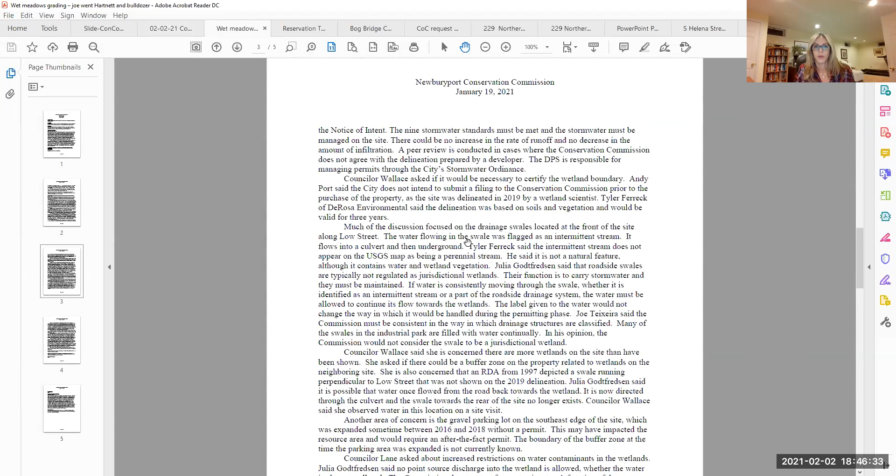Gretchen, the very last section on Plum Island updates, about halfway through that paragraph, it says the concrete block wall has been destroyed and could not be reinstalled, and there is now no remaining beach. It should say there's now no remaining dune. And then the next sentence, DEP would likely not permit some possible solutions such as a stone revetment or sheet piles, which could worsen the problem by creating end scour. That should just be scour. And then the next sentence, DCR has released the Upper North Shore Regional, it should say sediment management study. And that's it.

Good. Motion to approve as amended? Second. All right, Paul Healy, yes. Steve Moore, yes. Dan Warshaw, yes. David Vine, yes. Ron DeCola, yes. And I vote yes.

All right, the next item is Plum Island updates. Okay, while I bring up those photos that I sent you, maybe Joe or David, do you want to give an update on the other stuff that was discussed at the MRBA meeting last week? David, why don't you? Yeah, there was a meeting this past Friday, and quite a number of people attended. It was like 55, 56 or so.

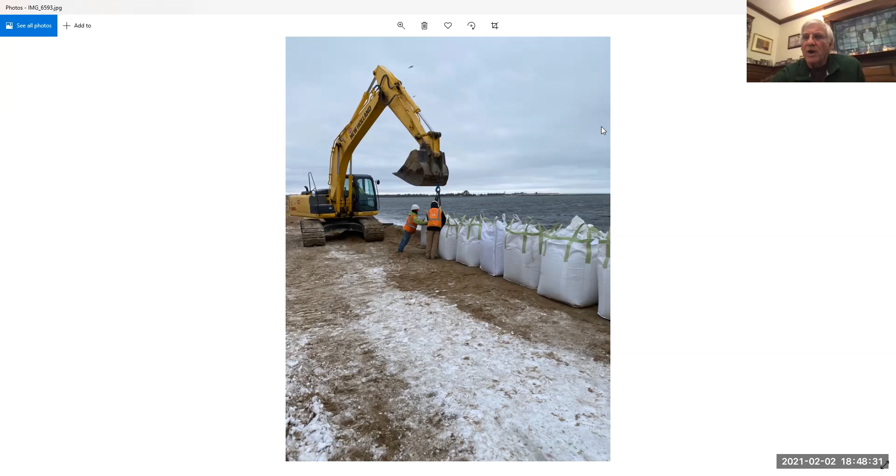The majority of it was about the dredging project. I would say the two dredging projects, the one from Portsmouth and the one in Newburyport. And I was a little late. Were they saying that the actual dredging was gonna start this fall? Or was it next fall?

I think they meant that they're going to try to start late fall, early winter of 2022. I mean, 2021, that makes a lot more sense. 2021. Oh, so that is this fall. Yeah, that is this, yeah.

And one of the things they talked about was the Corps is actually putting in for 60,000 yards within the Reservation Terrace area that would be included with the project. And they mentioned that if a larger amount, I think there was something like 225,000 yards they were kicking around, it's possible to get more of that. I guess it's important that the state DCR get involved in this because they'd be the sponsor. And it sounds like there's a lot of paperwork to get in place here. They have to all be permitted and so forth.

So it was very encouraging to hear that, as well as the Portsmouth project, which I believe the last meeting they weren't so certain was going to happen. And I guess now it's on its way to being implemented. Yeah, weren't these two projects two of the only ones that got approved? Yeah, they mentioned that it was very impressive that these two were. I guess there was a lot of competition from other projects throughout the country.

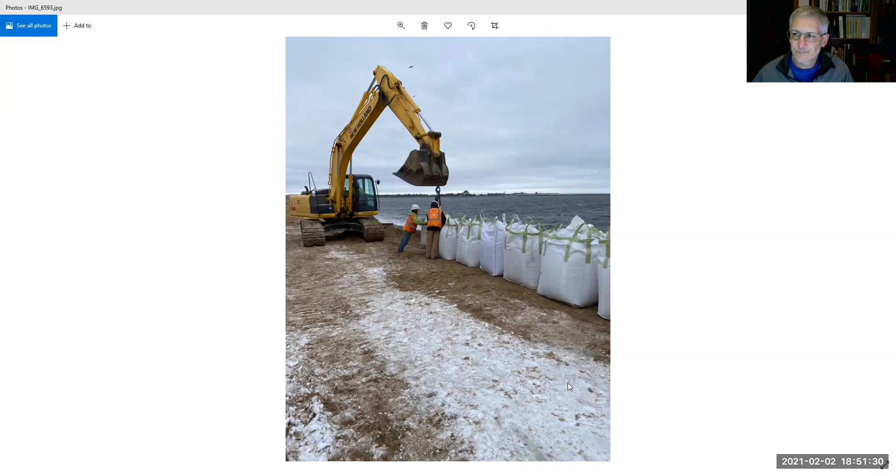So they had the call, and at first they were talking about stones and revetments and sheet piling and hard structures. DEP said no. CZM said no, they're not going to allow any hard structures out there. What they did do was commit to assisting with sand and more sandbags and maintaining it until the river gets dredged. So they committed DCR and the state to trying to manage this problem area until such time as we can put that dredged sand on the dune. And this was the first step in front of the storm, to put out these sandbags.

And they needed an emergency certification from the Conservation Commission to do that. So yesterday morning, I got a call from the mayor. I issued an emergency certification that I signed as the administrator. They started immediately. And the hope is that you all will ratify that emergency certification tonight. And I can show you now the next photo, so you can see how it went.

So this was this morning. That previous picture was yesterday morning when they were putting the sandbags out. And you can see what happened to most of them. There's still some remaining in the southern part of the stretch, but most of the rest kind of succumbed to the storm. The road, as you can see, was heavily damaged and broken up even further than it was before. And all that sand is just in Reservation Terrace. So it did help. It's hard to imagine what would have happened if those bags hadn't been placed there.

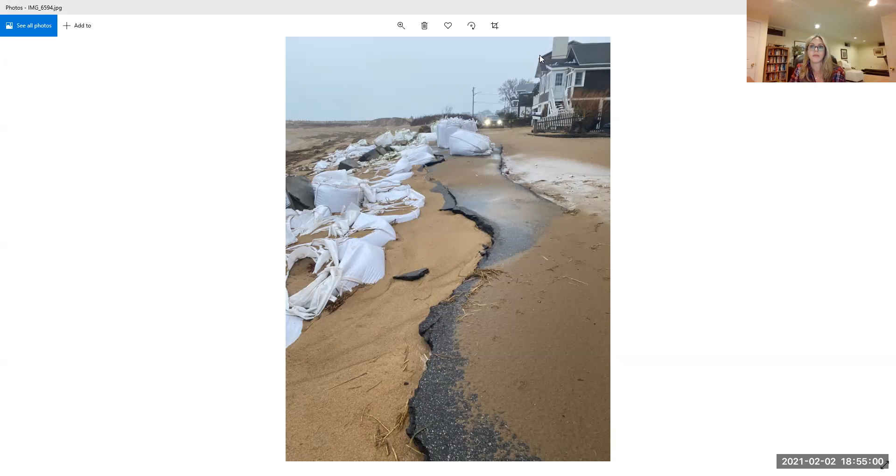Yeah, so far they've stayed intact. They've just sort of been emptied and pushed around and sort of covered, buried a little bit, as you can see in the pictures, but they have not shredded that I've noticed or that I've heard of, which is good. And on the comment about the no stone, was that as a temporary solution, or was that a no stone ever kind of position? That was a no stone ever kind of position, because I think the only way they might have ever even considered allowing it would have been for an emergency such as this, or a temporary situation, and they wouldn't allow it even for that. So they certainly won't allow it as a permanent solution.

As a new member to the committee, is there a reason for that? Yeah, it has a lot to do with coastal geology and coastal dynamics. When you put a wall or a hard structure on a dune that's getting any kind of wave activity, you actually end up undermining the beach and dune worse than where you started. It creates a different sort of physical dynamic. It ends up pulling sand out from underneath and around the sides of whatever that hard structure is.

They've been used over time, and you'll see seawalls and revetments all over the place in coastal areas, but they typically don't allow new ones unless absolutely necessary, especially on a dune. Because it's like saying goodbye to your dune and your beach. Yeah, the beach out in front of the stone on Newbury is essentially non-existent. It's always gone at high tide, and the rock piles just collapse too, and they've got to keep repositioning them. Right. So it really makes a mess, and it works just like the concrete blocks you can see there. Stuff just gets undermined and makes matters worse.

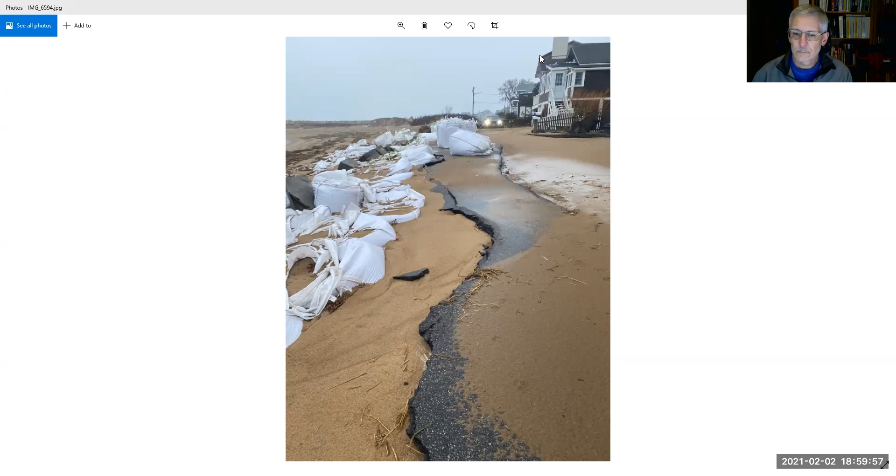Okay, I'm going to resume the share. So can you all see this emergency certification form now? Yes. Okay, so this is what was issued yesterday with my signature on an electronic signature form, but I would just reissue this same; they've done the work, it's all done. But technically speaking, it should be ratified by the commission at the next commission meeting, which is tonight. So if you all could take a vote to ratify this emergency cert, then we'll just sort of cross the Ts and dot the Is.

Just one quick question, I see the end date is March 1st. So does that mean if they go out there again, let's say this week or next week to put more sandbags out, we don't need to do this again? They're covered? Exactly. Yep, and I was very specific. I said placement of super sack sand filled bags and additional sand nourishment as necessary. So they can continue to go out there and add more sand until March 1st.

David, you have a question? It was the same question about whether we were going to be... Uh-oh. David froze. Oh, there you go. You're back. He's back. Okay.

So it's just through March 1st. If it goes beyond that? Goes beyond that, I think you can do an extension of an emergency certification. We've done that in the past, but either that or just issue a new one. Okay.

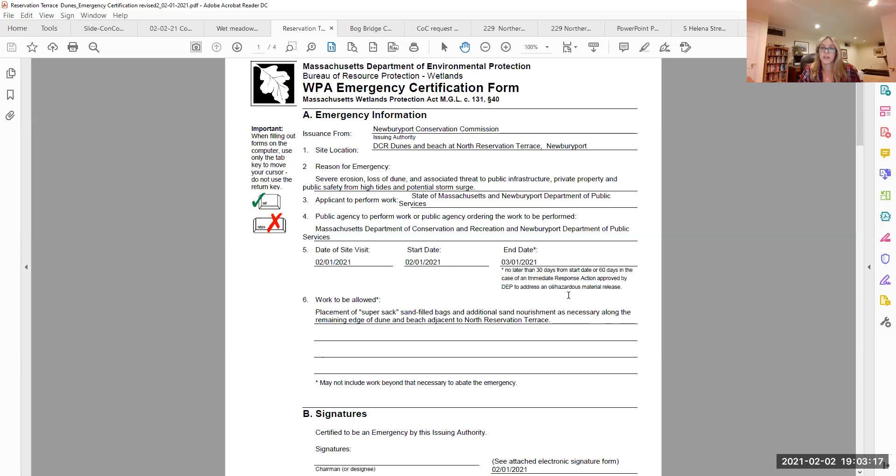I believe the case is because it's Army Corps of Engineers, they're exempt from local permitting. I don't think they need an order of conditions to do the actual dredging itself and to take the sand and place it out in their near shore disposal areas that they have already established. But to put it on the beach, which is the proposal they were trying to get approval for, and hopefully will happen, that will require local permitting through Concom and all the other associated parts. And DCR would be the applicant. Yeah, we'll have that probably, hopefully this summer. Good.

All right. You all set with Plum Island updates and such? All right, next item is the Marlene Schrader Nature Trail proposed bog bridge. Jerry Mullins. Okay, let's see if Jerry's here. Yes. Promoting you to a panelist, Jerry. Give yourself a second and then you'll be able to unmute yourself. Okay, I'm all set. Okay, great.

So at the last meeting, we talked about the bridge that was created across the small depression at the end of Colby Farm Lane. And let me just see if I can find the photos of that. Well, in any case, hold on. All right, can you see this? Yep, we can see it.

So it was determined that the bridge that was created was not safe and was actually also impacting the stream bed. And so it needed to be rebuilt. And so you suggested a bog bridge. Can you all see this? Yeah. But this isn't what you wanted, right? No, I thought you were gonna pull up the picture you took of that area, but I know, I can't find it right now. Okay.

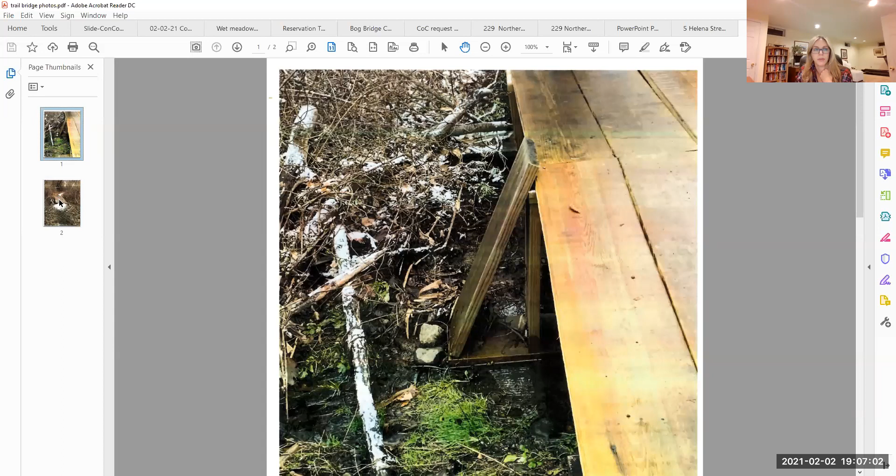Okay. So Julia, if we could go back to that initial drawing you had up there that showed a bog bridge, and maybe that was Jerry's screen, I don't know. Yep, I got it. Hold on a sec. This one. Yeah. So I'm not opposed to what we just talked about, but this is what I think of as a typical bog bridge. It's actually logs cut in half, attached to those sleepers, but lower down, it also says that we can have full logs.

And I had a question. Joe had submitted a drawing with the boards across with that extra support underneath, and I don't know if you have that drawing at all. Let me see if I can bring that one up. That was really excellent. You know what? I tried to get that to load into Zoom earlier, and I couldn't copy it from Joe's email. So I apologize, I don't have that to bring up. But Jerry, do you have that? Maybe you and Joe can explain to the rest of the commissioners what that looked like.

Well, basically I have 2 full logs on either end. And then in the middle, we'll have those long 12-foot lengths butted up against, and then underneath will be an extra board that'll help brace it. Plus there's 2 smaller boards that could be put right about where the logs are to keep it firm. So the whole purpose is to stop the bounciness. And I had a question about that, Joe.

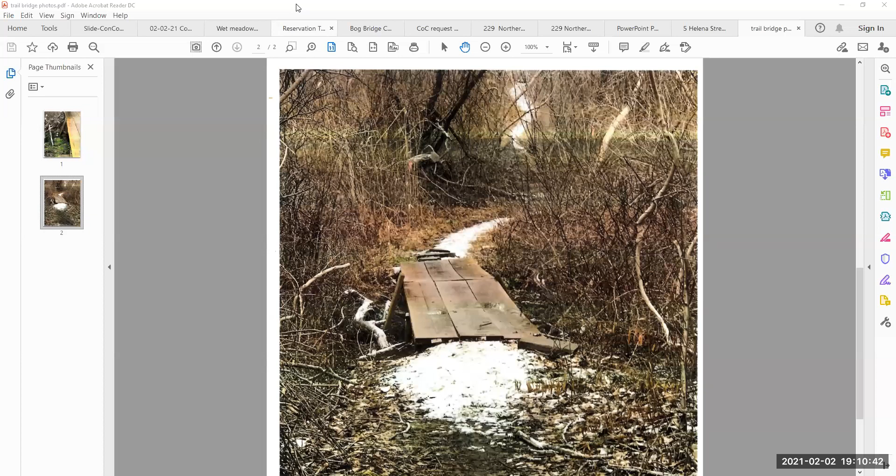But I don't know what size logs you have, Jerry. I sent a picture of some of the leftover logs, I don't know if you have that, Julia, that were left over from the Boy Scouts project, and they're massive. So I'm going to be hauling them over the hill and back down to here so we can use them. So Jerry, the picture that's up here, those are the boards you're planning on reusing, correct? That's correct. So the bridge that's there is actually 24 feet then, right? Right. So it's going to be half that length and hopefully less bouncy.

No, it'll be the full length, but those two right ones will be put underneath to make it firm so it won't bounce. Or bounce less. Yeah, or bounce less. Okay, so it's still going to be 24 feet long. Right. So what's going to be in the middle that's not in the stream, tying those together? Those two extra boards to make it firm.

Yeah, the two lengthwise boards there on the right will just get screwed to the bottom of the pair of other ones as extra. So there's not going to be any support to the ground in the middle. Right. It'll be open for the stream. That's the idea. Yeah, I guess we'll see. I would see that still being pretty bouncy.

Yeah, and you definitely would need pretty strong screws rather than nails for that to hold. Definitely. It's worth a try. Otherwise you'll need longer boards. I'm thinking, well, would a 12-foot bog bridge accomplish what we need? I mean, I just think a 24-foot span, even though you've got something underneath, is still going to be pretty bouncy.

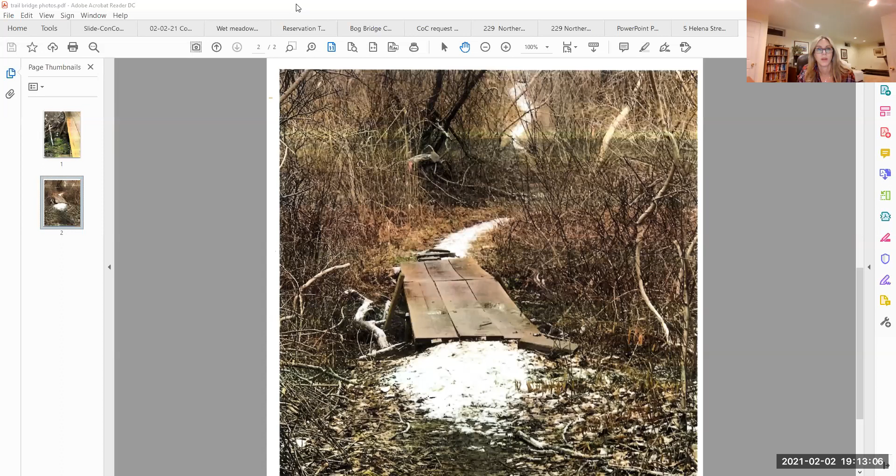You may be right, Steve. And that was my original drawing I submitted. That would be a shorter length. I can go back to that. Yeah, let's see that. That was here. Yeah, I wasn't seeing it as 24 feet. Thought it was shorter than that. Yeah, this one, 12 feet.

Yes, but what worried me was that you've got these supports down at the bottom at the base of the stream. So if there's more flow down there, that's really the topography, then they're going to be in the stream bed. Well, I can make sure they're up on the bank. It's a pretty steep depression there, so.

I can safely say from experience, if it's really flowing there, it doesn't matter what kind of bog bridge is there. It's probably gonna take it out. If we get another Mother's Day storm sort of thing, that's definitely not gonna stay. But that's kind of a flow by; the main culvert and everything is further to the left on that path.

Or right, I don't know which way we're looking here, but there is actually a culvert that the stream normally goes through. And when there's really heavy flow, it goes over the path there, and it also goes over the path here pretty strongly, shall we say. So I think we need to go out there with a measuring tape. We can sit here and try and engineer it, but maybe Joe and Steve, you want to meet Jerry out there and work through these details? Yeah, sure.

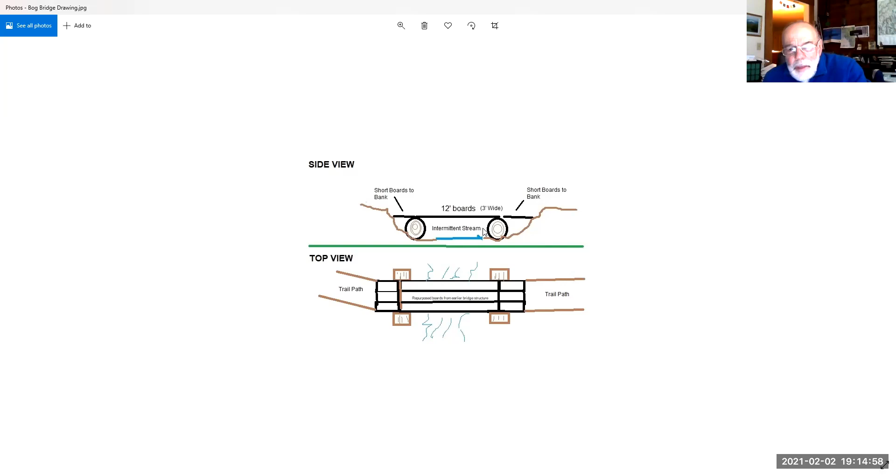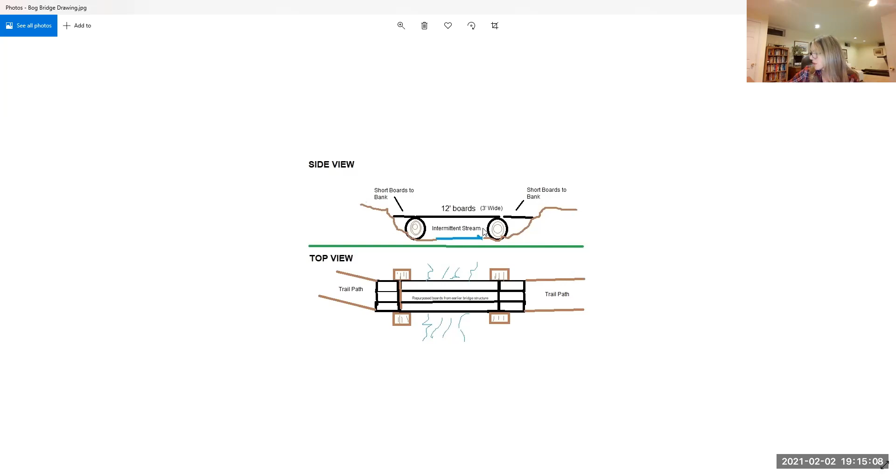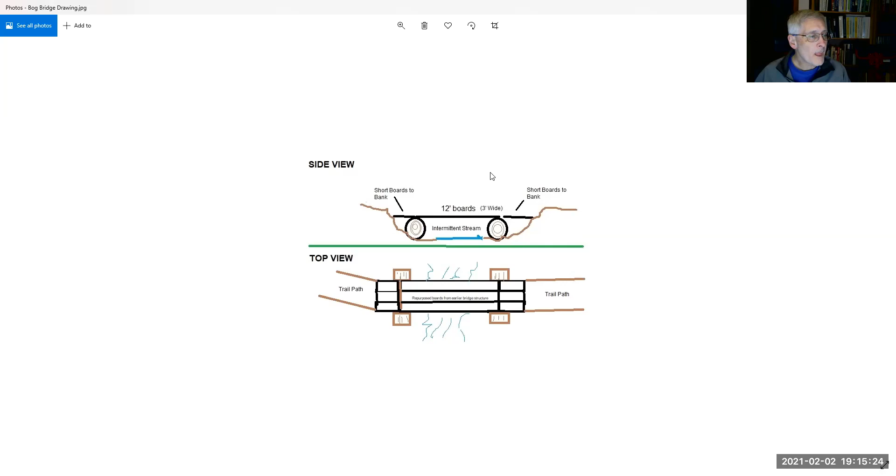I think even with the snow, we could probably take a look at it and come up with something. Oh, yeah. Okay. That sounds great. All right, well, the three of us will organize that. Great. I'm available the rest of the week. Okay. I'm sure I can find time. All right, we'll contact each other. All right, thank you.

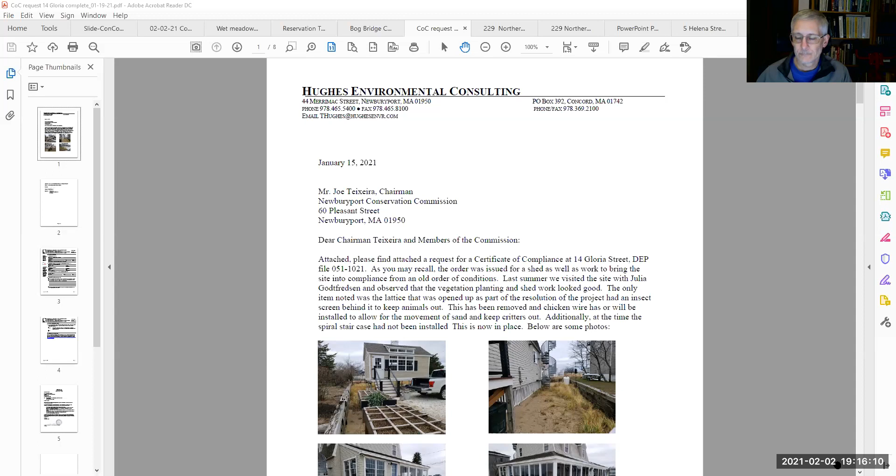Let's move on to Kevin J. Legacy, trustee, Basin Realty Trust, 14 Gloria Street. Request for certificate of compliance. All right, I'm going to promote Tom Hughes, if he's here, to a panelist so he can present this request for certificate of compliance. All right. You guys can hear me? Yep. When you promote me to a panelist, it logs me out for a second, so sorry for the pause.

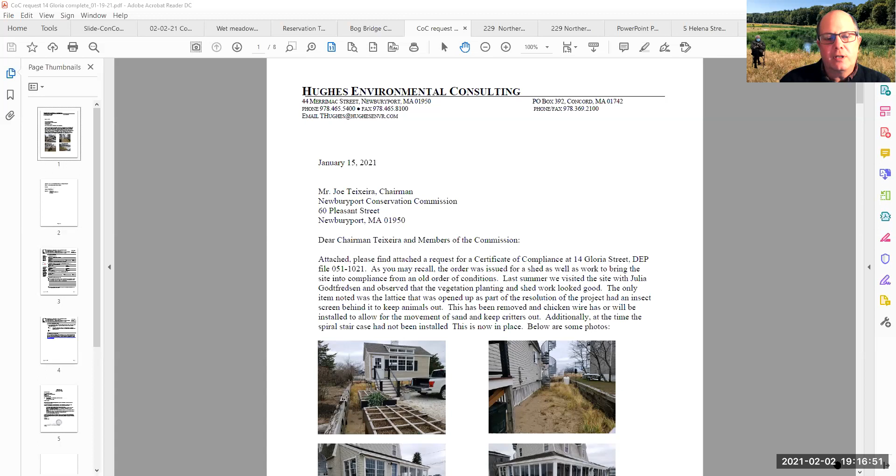All right, you may remember 14 Gloria. We came in, there was an old open filing for the building of the house, and you guys did a site visit, and we basically closed out the old permit, permitted some remedies for some issues, and also a new shed. And so all that work has been done. You can see the shed in that photo. I can either share it, or Julia, if you can just scroll on those photos a little bit.

Yep. Now these photos, the vegetation looks a little less impressive because of the time of year these were taken, but we visited the site with Julia over the summer, and the vegetation really looks great. So on the shed, among the minor deviations that Everett called out in his letter, the stairs are a little bit longer, but that's because the shed's a little bit higher up in the air.

So I think it's a little bit of a win-win for that. You can see we certainly have our 2 feet of clearance under that shed. You can see the vegetation is growing in and around that shed really nicely. And then you can see the spiral staircase is in. The area where the footpath was shown going to the spiral stairs has vegetation coming into it, so there's more vegetation than we actually said we would be planting.

Everett did note that there's a small platform under the grill down there on the bottom, but it's just to keep the grill from sinking into the sand. It's nothing like the network of on-ground platforms that were there when we first visited the site. And you can see the vegetation is growing beautifully all around there and right up to the street. So the site looks great.

When we did do the site visit, the applicant had put some insect screen behind that lattice because critters were getting in underneath. That's been removed, and we talked to Julia about putting something that's sort of 99% open, like some chicken wire in there that would still keep the critters out, but not be as much of a block as the insect screen. Now he hasn't put that in yet, but if the commission's okay with that, he will be putting just normal hexagonal chicken wire.

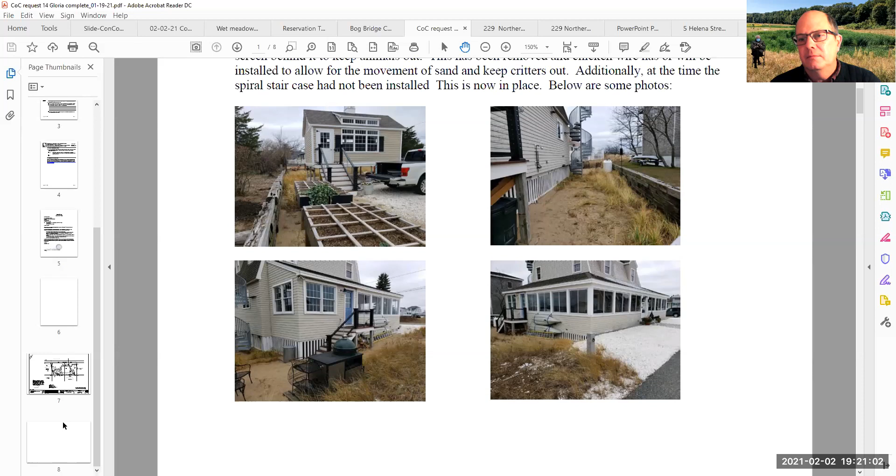Okay, do we have any questions? Does Senator Sanders have any comments? Oh, he's too busy sitting out at the Evergreen Field.

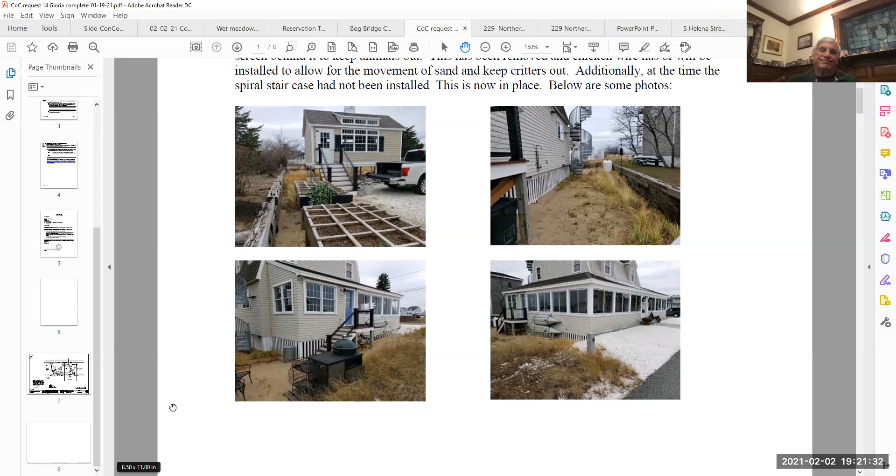Is there a motion to issue the certificate of compliance? Second. Paul Healy, yes. Steve Moore, yes. Ken Warshaw, yes. David Vine, yes. Ron DeCola, yes. And I vote yes. All right, thank you. Thank you very much. Take care. Thanks, you too.

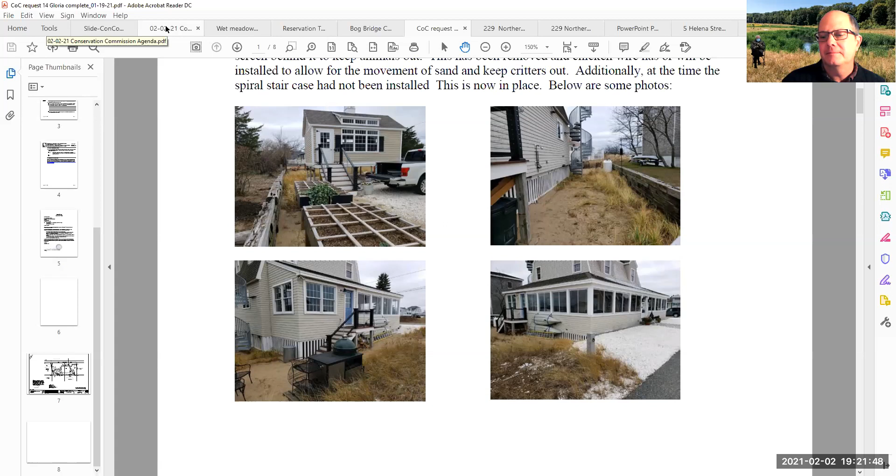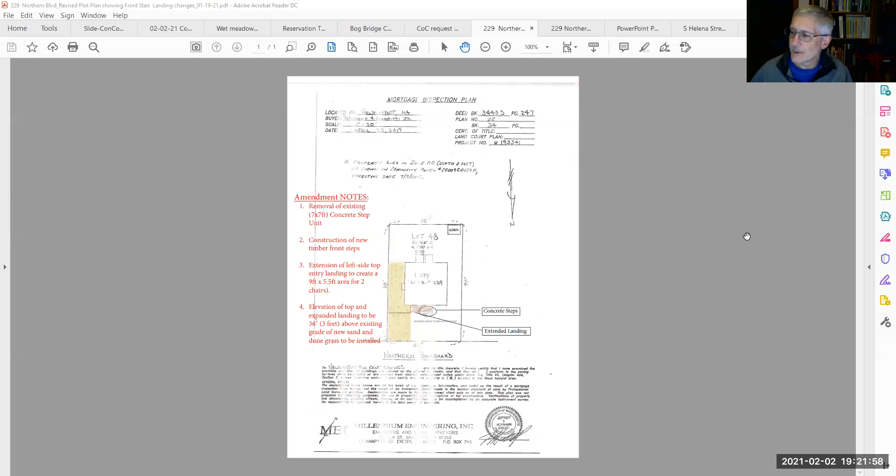All right, next item is 229 Northern Boulevard Realty Trust, Rob Champetti. Amendment to the determination of applicability. Rob, I'm promoting you to a panelist. You're gonna blank out for a minute and then you'll be with us over here. Hello, Chairman Teixeira and members of the commission, good evening. Again, my name is Rob Champetti. I'm the trustee and the owner. My wife and I own this cottage.

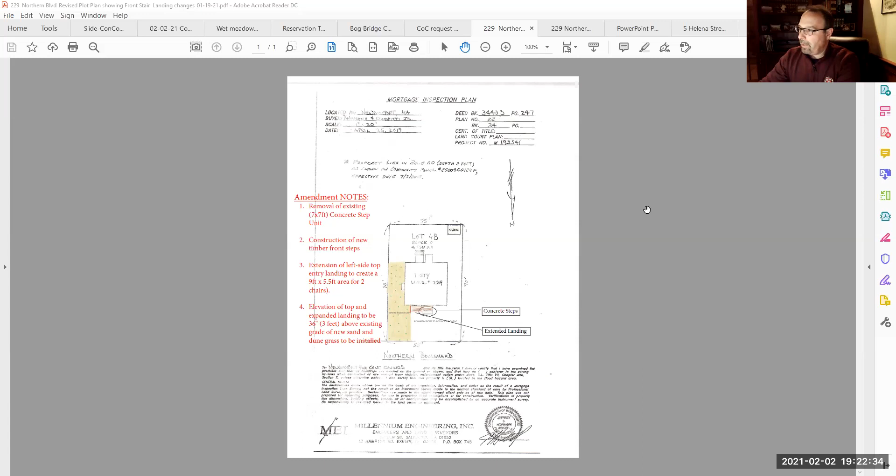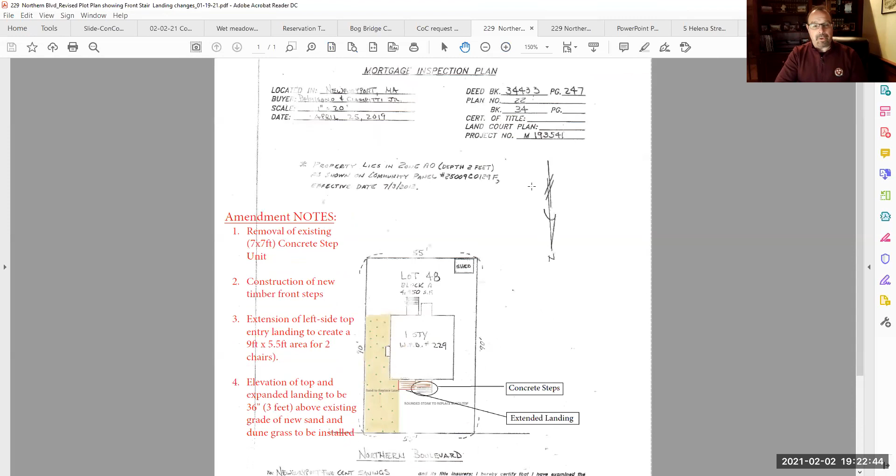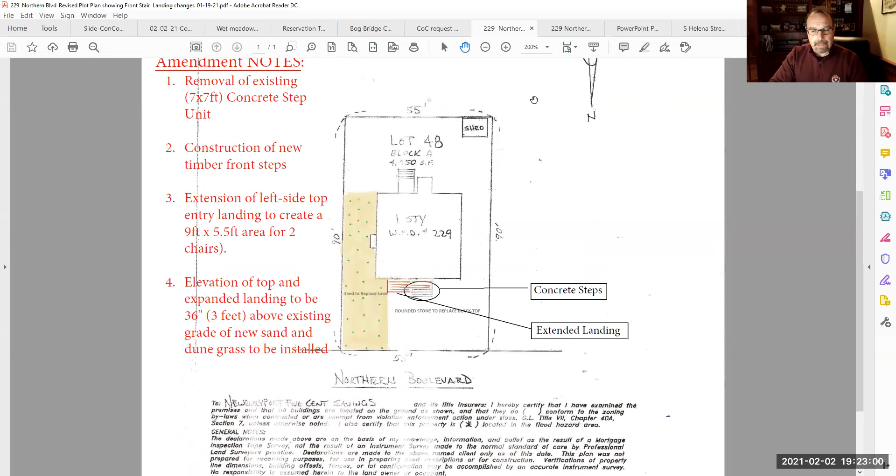You may recall, I was before you at the hearing on, I believe it was January 5th, on the notice of determination of applicability. That was an application to remove approximately 1,800 square feet of lawn area and approximately 900 square feet of asphalt, all of which was non-indigenous, and replace the lawn area to the left or the southerly side of the home with indigenous sand, and then plant indigenous Ammophila breviligulata in the sand at approximately 12 to 18 inch spacing intervals.

We also proposed rounded stone in place of the asphalt, and as you may recall, a retaining granite cobble as well to sort of finish off the space. The commission was kind enough. This application was met with the commission's approval.

I'm back before you with a request for a minor modification or an amendment, and basically what we're seeking to do this evening, having already begun that process, it occurred to me that what remained on the site was also a non-indigenous poured concrete single unit from probably Shea Concrete of a front stair, essentially the kind of front concrete poured stair that's installed, lifted in by truck crane and popped into place.

This was here when we purchased the property, so it was certainly pre-existing, but my goal is to remove that and in its place build a sort of a timber stair, pressure treated decking stair up to that front door.

And what I'd like to do as well, and I'm hoping that this is something that would meet with the commission's approval, is to extend the left side or the southerly side of that landing with what I hope you'll agree is a modest landing or deck extension, so that I can put two chairs and enjoy all the sand and dune grass and other things that we now have. We have no outdoor space on the front.

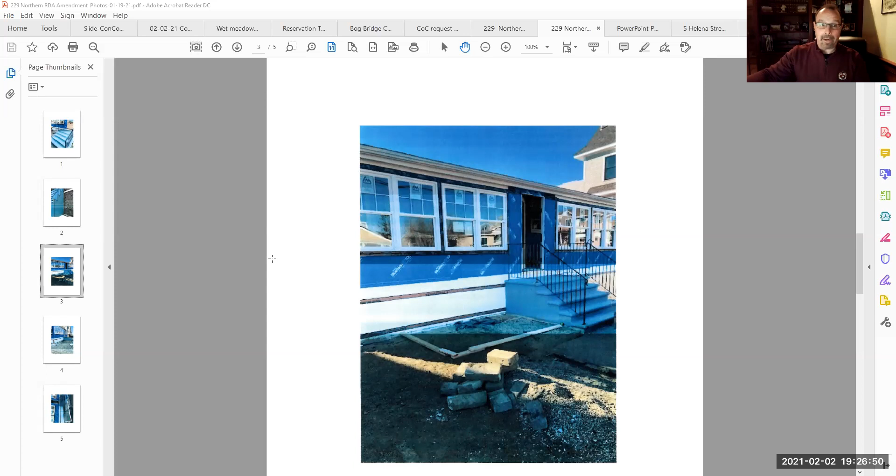Okay. What I'd like to do, and this is something I want to pose to the commission, if it's possible, while still staying at least 2 feet off, I'd love to try to skirt open lattice, still allowing for the wind, wave, and water action that's contemplated in a dune resource area, though hopefully not here. I'm hoping I don't see any wind, wave, or water action here, but to just create a little bit of a screen, because the dune grass will cover the rest. And I'm probably going to go a little closer in interval planting of the Ammophila along the front, just because I want it to have sort of a natural scape.

So I'm sure you heard the discussion from the previous whatever thing, we were talking about the lattice work and critters getting underneath it and making a home. So you may not want to do that. And perhaps, to soften the effect, if you planted some native shrubs like bayberry or beach plum to kind of cover that opening, you might be better off in the long run.

I think you're probably correct, Mr. Moore. I think as we formulate, of course, in the hopeful assumption that it's met with this commission's approval, as we start to formulate this on site, we may well find that the elevation will dictate the best approach. And I think the commission is hopefully confident in where the spirit of this is headed, and my intent is to certainly not do anything that would degrade from that end result, or be contradictory to the idea of keeping this open and appropriate under the circumstances.

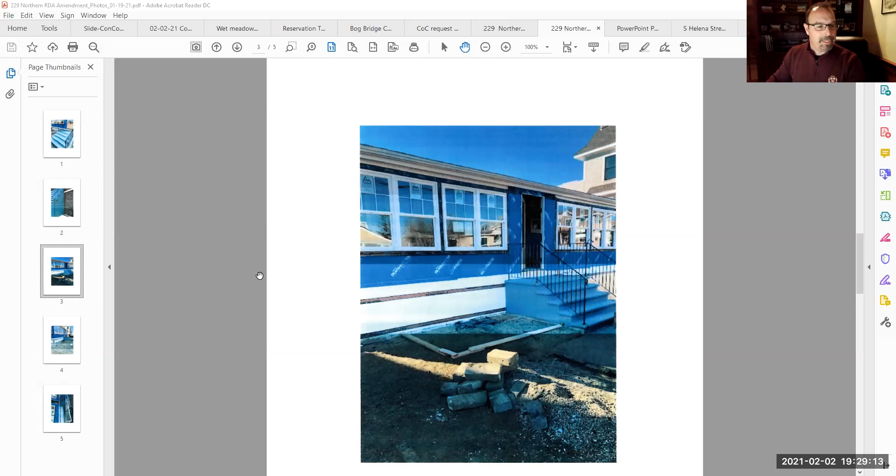I agree, and thank you, Julia. If it is acceptable to the commission, I would love to have the flexibility of doing that, but no more than that. And it would essentially be a trim. I wouldn't necessarily go so far as to call it a skirting, because it couldn't mathematically come any more than 12 inches below the bottom of the PT framing.

But it will be met with a majority of the screening from the dune grass and perhaps other ornamental but indigenous grasses that we would find are nicely placed there. At the end of the day, it's going to be open by and large. So I'm hopeful that the critter problem is nothing that is going to be attractive here.

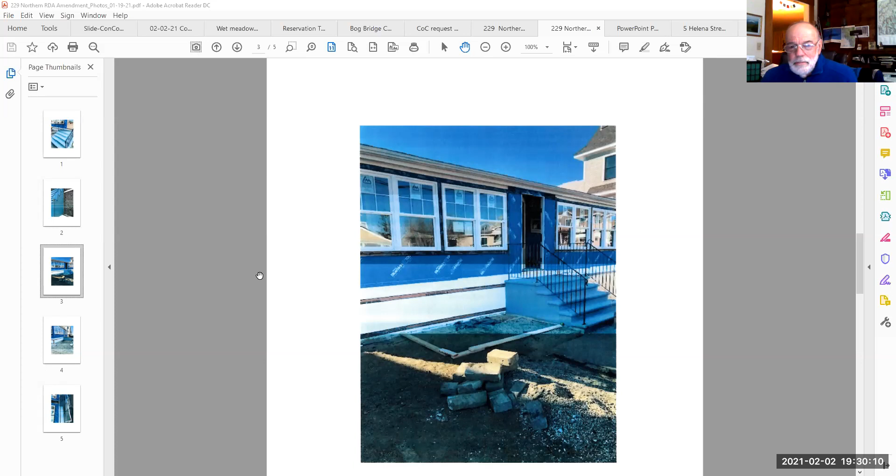Okay. So when we did the RDA, that was a -2, right? Which meant no conditions. I guess the only thing, with this addition, it's a little bit more work, and I just would like to have a final inspection to make sure it's okay. Sure. Would you want to put a special condition on it and make it a -3? Yeah.

What would that be, that we could say any skirting, lattice or other framing should not come down below 2 feet above grade and shall require a site inspection by the administrator post-construction? Yeah, require approval by you.

If I find that skirting is not workable or doesn't seem desirable, would that still necessitate it? And certainly I'm happy to have Ms. Gottfredson come out. I just don't want to overly tax an inspection if we end up not doing it, but I will leave that to the commission and to the administrator. Yeah, and Rob, you could even just send me a photo at that point of what you've come up with in the end. Okay. Happy to do it. Absolutely. Okay.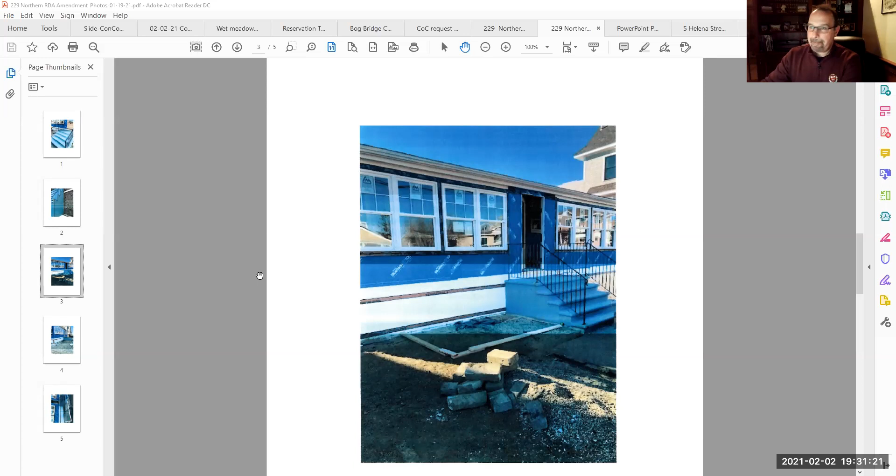How about we just say in the special condition that a photo is to be provided to the administrator? That's fine. So are we going to be creating a new determination of applicability? Yeah, essentially it's just going to be a reissuance of the same one, but in this case the modification is the attached revised plan showing these details. And it would be a -3 instead of a -2 and a new signature. It just wasn't necessary to have him resubmit an entirely new determination since this was just an add-on to the existing application. Sounds fine. All right.

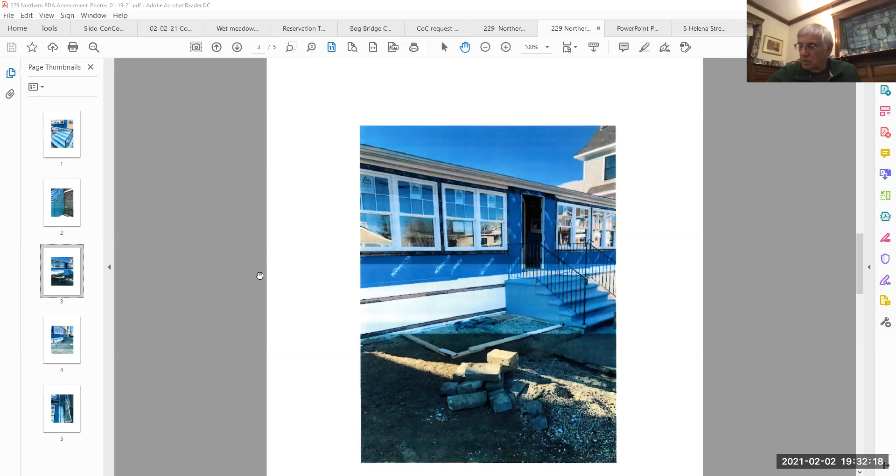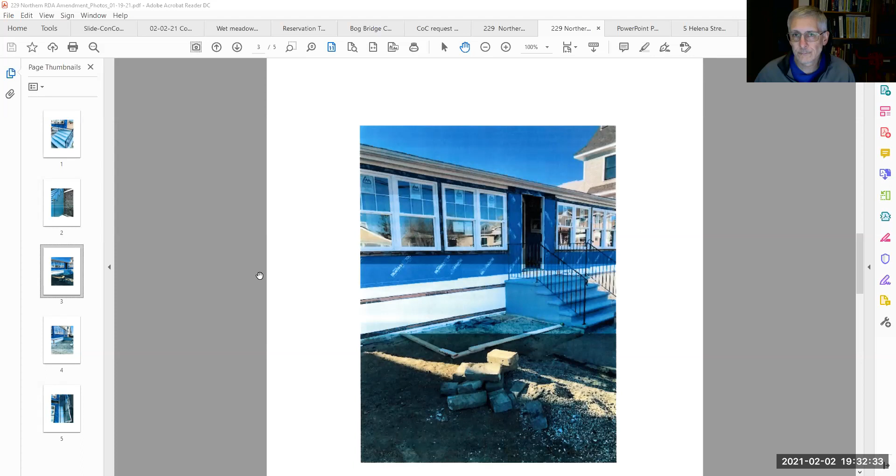Okay, so I'll make a motion for a -3 determination with the special condition that we discussed. Second that? Okay. Paul Healy, yes. Steve Moore, yes. Dan Warshall, yes. David Vine, yes. Ron DeCola, yes. And I vote yes.

Thank you, Mr. Chairman, and members of the commission, thanks very much for your time. Julia, thank you. And stay well, stay safe, everybody. Good job. Bye-bye.

All righty. Can I get a motion to open the public hearings? So moved. Second. All right, Paul Healy, yes. Steve Moore, yes. Dan Warshall, yes. David Vine, yes. Ron DeCola, yes. I vote yes.

I really would like to just do a voice vote. Well, I'm sorry, I was promoting everyone to panelists. What did you say, Joe? I really would like to be able to do voice votes like the city council does. Oh, yes, you can do that if you want. That's fine. Okay, well, then we're going to start doing that.

Okay. All right, first item is City of Newburyport, Upper Artichoke Reservoir Bridge, notice of intent. Okay. Evening, Commissioners. Are you there, Sarah? I am. Hi.

So Julie, if I could ask you to share the PDF that we sent earlier. Oh, am I not sharing? Do you see it? It should say Newburyport Conservation Commission BSC group. I see it now. It disappeared. Oh, okay. Got it. Change of screens when videos come on. Got it. Let me just rearrange these things so I have everything accessible. Feel free to just tell me which page you want to go to. Exactly. I'll let you know when I'm ready for the next one. Okay, if you don't mind, we'll begin.

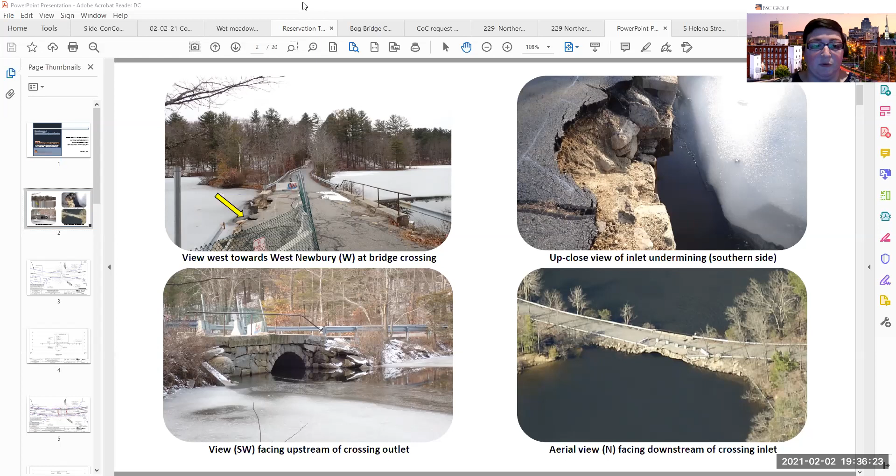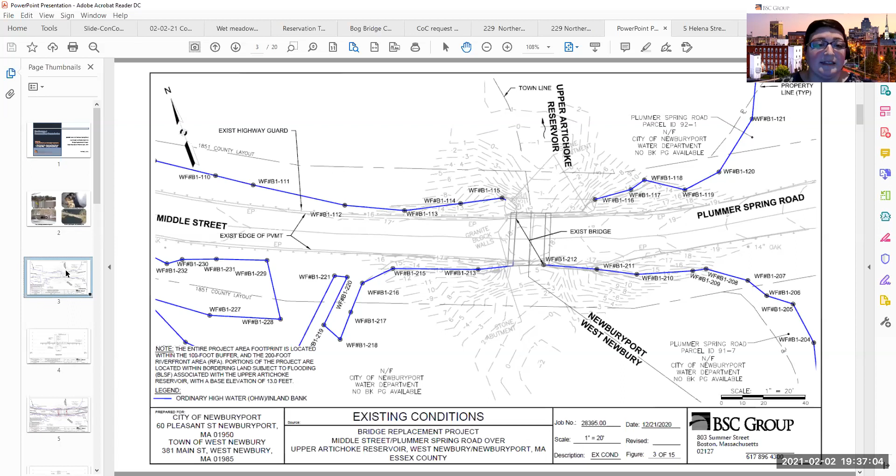The roadway and bridge were originally constructed over the Artichoke River in 1891. The area was later dammed up and became the Artichoke Reservoir as it exists today. The bridge crossing itself straddles the municipal line between Middle Street, West Newbury, and Plummer Spring Road, Newburyport. The project occurs 0.4 miles west of the intersection with Turkey Hill Road, Newburyport, on an existing paved road, which is classified as a rural local road. The nearest house is more than 750 feet away. While the roadway is flat, removal of some small trees along the slopes down to the reservoir will be necessary for access and construction. Next slide, please.

The existing structure is a single span earth-filled stone arch and is approximately 14.3 feet wide, 13.2 feet high, and 24.2 feet long. Portions of the bridge, stone head wall, and southeast approach roadway have collapsed, and the paved roadway foundation is undermined. The Upper Artichoke Reservoir flows northerly in an open water area and is bounded by protected forested lands. While bankfull width for the Artichoke River is 28.4 feet, as reported by StreamStats, the reservoir itself is much wider. The minimum width for stream crossing standards is 34 feet, but the proposed new clear span is 41.5 feet.

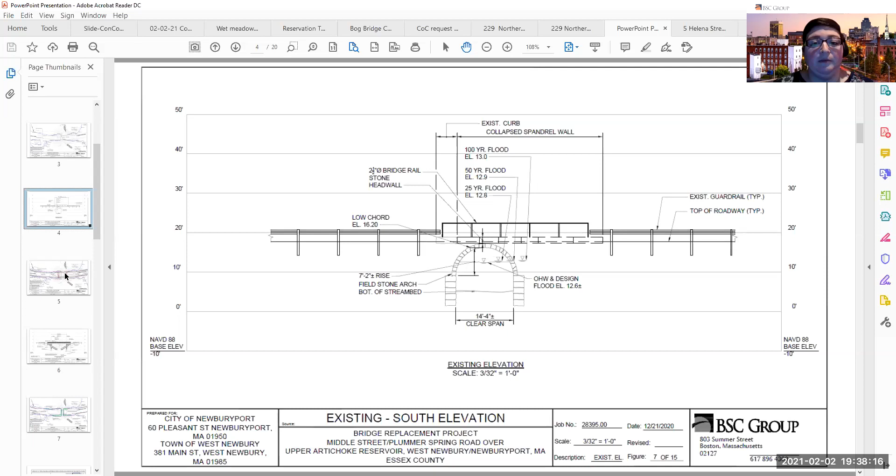The stream bed near the crossing is characterized by sand and cobbles with trace amounts of silt and gravel. The crossing is located within Zone AE for the 100-year storm event at and below the 13-foot base flood elevation. The Artichoke Reservoir is a Class A public water supply, an outstanding resource water. There is no rare species habitat in the project area, and neither the Upper Artichoke Reservoir nor the river are EPA impaired waterways nor cold water fisheries. Next slide, please.

The proposed project is characterized as a redevelopment project, but will preserve undisturbed areas adjacent to the crossing to the maximum extent practicable. The proposed project design complies with the Massachusetts stream crossing standards as required for a limited project under the Wetlands Protection Act. The crossing is proposed to be replaced by a precast concrete structure that will follow a similar horizontal and vertical alignment as the existing bridge and will continue to have an open bottom with natural stream bed material. The proposed span length will increase from 14 feet to 41.5 feet. The overall width of the bridge will be 32.5 feet to accommodate safety improvements, including a sidewalk. Next slide, please.

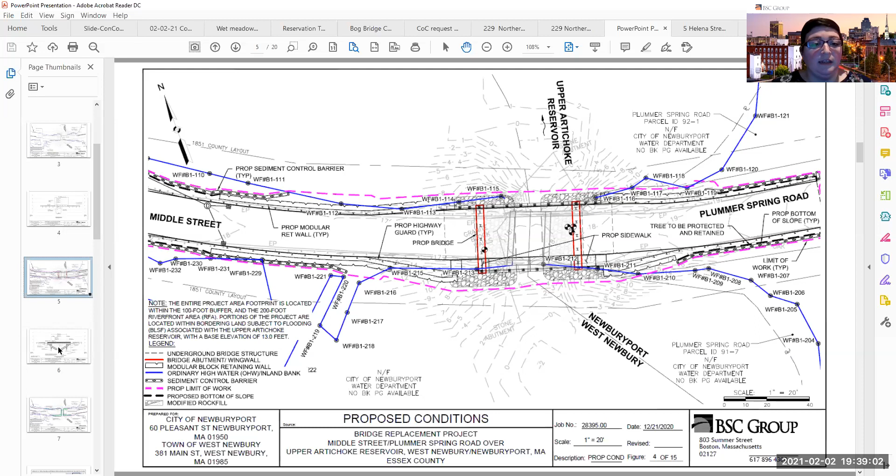In accordance with the MassDOT Bridge Manual for a rural local road, the proposed bridge has been designed to meet the 10-year flood frequency storm event, can accommodate the 100-year flood frequency storm event, and increases the hydraulic opening by a factor of 2 compared to the existing conditions. Additionally, while the low chord of the bridge will stay the same, the proposed roadway elevation will be 1.5 feet higher, which will help mitigate possible roadway flooding.

The proposed bridge will have a slightly larger footprint than the existing bridge, which will improve the openness and span size over the reservoir, which in turn will provide environmental benefits such as improved wildlife passage and connectivity, and the increased hydraulic opening will better facilitate reservoir maintenance. Next slide, please.

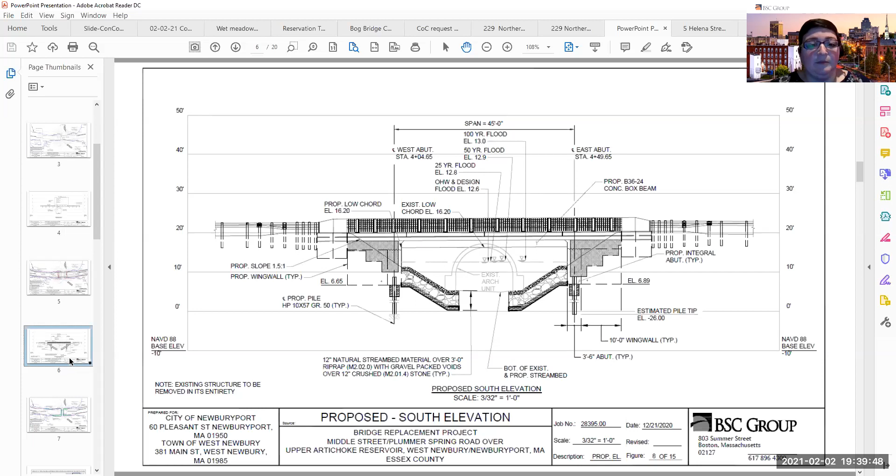Approximately 630 square feet of temporary and permanent impacts to land underwater are anticipated in Newburyport as a result of the bridge removal, construction of the new wing walls, abutments, and retaining walls, and the riprap placement to protect the bridge. Additionally, a gain of 449 square feet of land underwater is proposed for the design openness.

Approximately 70 linear feet of temporary and permanent impacts to bank are anticipated in Newburyport from the bridge removal, placement of riprap and retaining walls, and reconstruction of the bank. All temporarily impacted areas will be reseeded with an appropriate seed mix.

Less than 50 square feet of alteration to bordering land subject to flooding is anticipated in Newburyport from the bridge removal and placement of riprap and retaining walls, but the design proposes 344 square feet of floodplain replacement, which will increase overall storage capacity. Total amount of riverfront area in the Newburyport project area is about 6,300 square feet. A majority of impacts to riverfront area will occur in previously degraded areas, around 2,700 square feet.

New impacts to riverfront area are required to ensure the stability of the new bridge structure and prevent degradation of the newly improved site. Specifically, new riverfront area impacts will occur as a result of new scour protection for the bridge footings and abutments, retaining walls, roadway expansion for the sidewalk, and new roadway erosion improvements such as guardrails. The additional area is approximately 1,200 square feet. Additional temporary impacts of 550 square feet of riverfront area are required for construction. And again, all temporarily impacted areas will be restored to pre-construction conditions with loam and seeding.

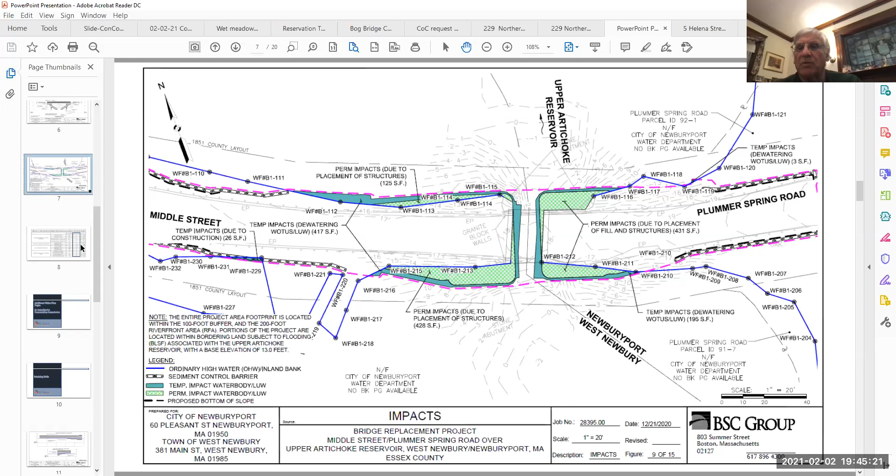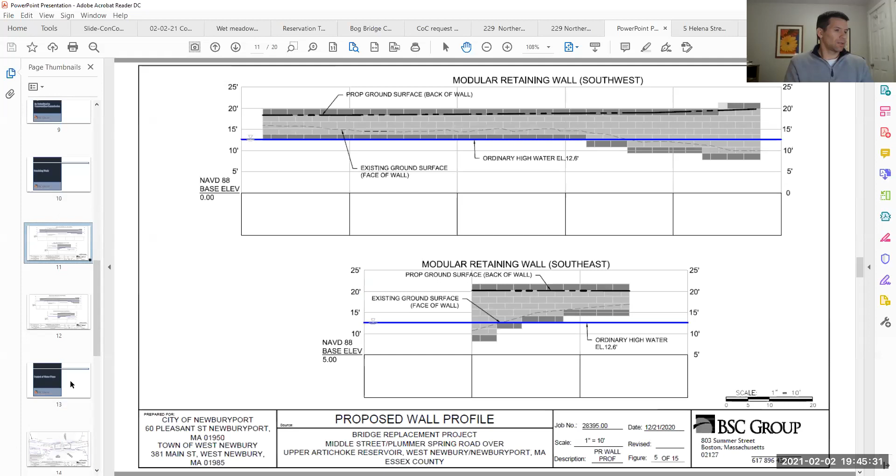You had mentioned about the contractor being responsible for the method of dewatering, but generally you have some idea as far as how this is going to go forward. Could you explain it a little bit more? I couldn't really pick up much from the plans. Sure. If we could scroll down, let's see. Is this the one? No. That is one. Yep. This it? Yep. Sort of all together. It's in order of the design. You want me to start with this one or go straight to the dewatering? Why don't we start with the first one? If the commission would like, I can kind of go through the anticipated construction. Yeah, I think that's helpful.

So again, the selected contractor would be proposing a demolition plan. At my previous job, I was involved heavily in construction. So what we envisioned would happen is there would be an item for shielding. We envision that they drive approximately 4 H piles. They'd have a beam that runs between it underneath the bridge. They could slide steel plates on top of that, push it underneath, so that would shield it so the debris from the demolition does not fall into the reservoir. So that would capture it. You'd remove the crown of the arch. After that, you'd be able to drive sheeting to encapsulate the area. If we could go to the next slide.

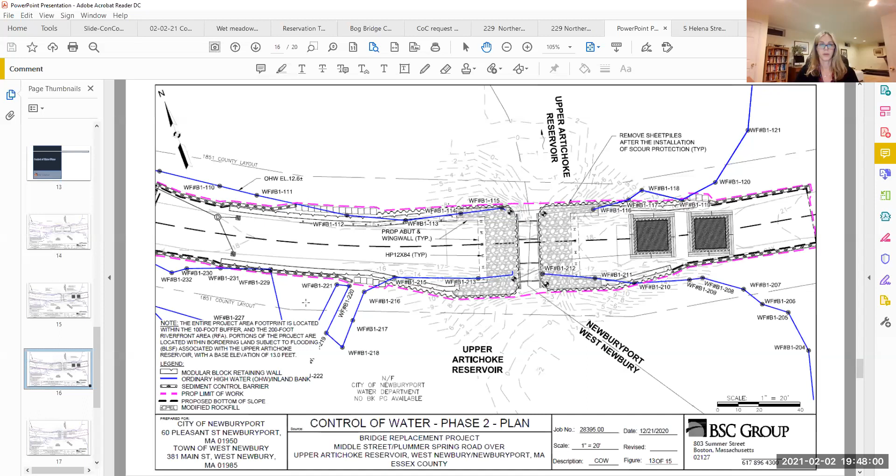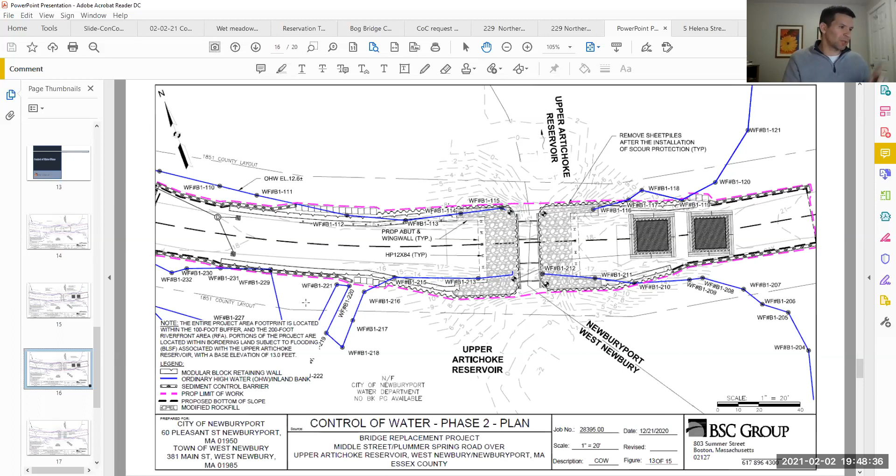Sorry, this one? Yep, so this is when they are driving piles for the actual bridge itself. This would be an integral abutment bridge. When I say integral abutment, it eliminates joints. So for the thermal movement of the bridge, the piles flex to accommodate the thermal movement. That's what MassDOT is really pushing nowadays. Joints and water leakage destroys a number of bridges. So this would be for the foundation that's being put in. Next stage, this would get them out of the water after this stage is completed. If we go to the next one. And then they would be putting in the precast box beams at this stage. And so at this point, they would be out of the water for the bridge.

And then on the next one, this kind of shows everything in elevation. It may help explain what I was talking about. So you can see in the first one in the upper left-hand corner, that's when they're putting in the shielding. They removed the top arch, so then they were able to drive the sheet piles. So then they de-water because the water is still flowing through the channel. They're able to construct the substructure of the bridge. They remove the control of the water, the sheet piles, and then they were able to build the rest of the bridge.

So are those dark lines, is that the riprap coming down from the abutments? That is correct, yes. And that would be in the dry as well? Correct, yep. Okay. And then, of course, covered with natural stream bottom material.

And the water would go into these basins, and as far as removing them from the basin, you have that worked out as far as turbidity and so forth? So if they do use, the commercial name for them is dirt bags. They look like hot water bottles. The water flows in and it filters out the sediment, the clean water flows out. When they get too filled up with sediment, the way you can tell that they're no longer functioning as intended, they get larger. So that's the time that they have to remove them from the site and replace them. Okay, so it's actually replaced.

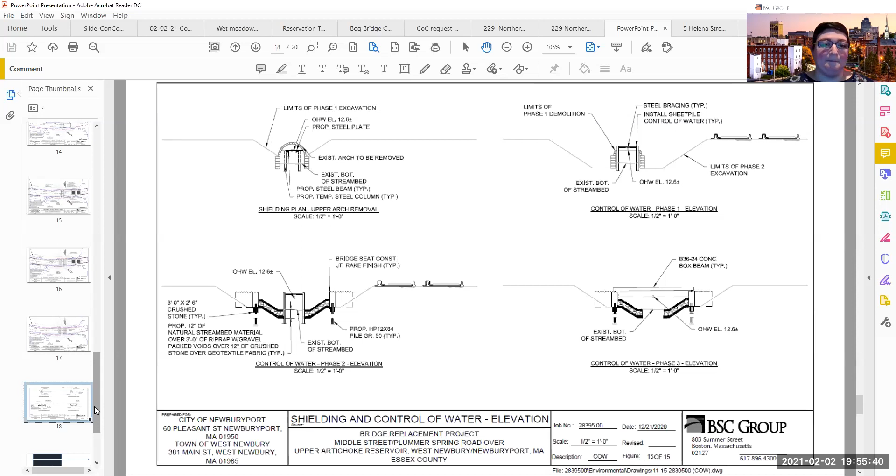And can you drive down to the bridge from the Newburyport side, or do you have to walk? You can drive down, there should be a pull off. If you're coming down, there's an area where you can park, and you can park right along it. You would have to walk probably like 100 feet. I know you don't like walking, Steve. Yeah, I can probably manage that.

All right, so Sunday the 7th at 9 a.m. I think that'd be helpful. Let's go out and take a look at where they're gonna have staging, where we could have them put the dewatering bags, that kind of thing. And also, we need to look at the stormwater issues, right? Yeah. If I may add to that, just to help out the commission.

We're using the sidewalk to determine the limits of new berm that we want to put in. We want to capture more runoff from the roadway than exists now, because right now there's country drainage that goes right off the road over the riprap straight into the reservoir without any treatment. So I was working with BSC and trying to get them some information. I didn't get it to them in time, so we're going to add it.

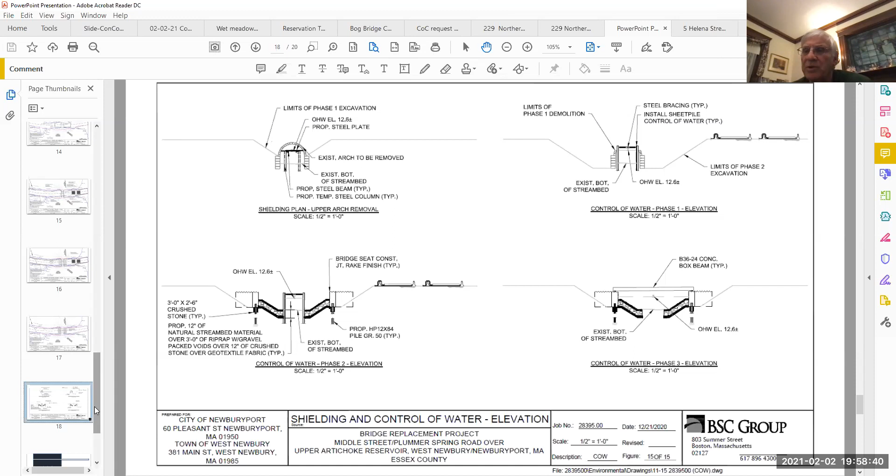Just a quick question going back. How about stockpiling materials, excavated materials, bridge components and so forth? Is there a laydown area of some sort here? Mike, I think I can handle that. Let me just add one thing, and then you can add your expertise about the materials. It's like 2,000 feet to the closest home. There's like 2 homes on Plummer Spring, right at the intersection with Turkey Hill.

So what we're going to do, Dave, is give the contractor the ability of using that entire 2,000 foot stretch. What I envision is a very long staging area. All the aggregate we want to get as close to Turkey Hill as we can, because on both sides of the street there's country drainage with a ditch that on the land side has 2 culvert crossings. So with those tubes or hay bales, what better place to stockpile, so that by the time any sediment gets into the reservoir, it's dozens and hundreds of feet.

I hope that helps. Could somebody describe what country drainage is? It's a simplified MassDOT term. Roadways either have no curbing or they have curbing. If they don't have curbing, it's called country drainage. Okay. It just means there's no treatment whatsoever, right? It just means it runs overland flow.

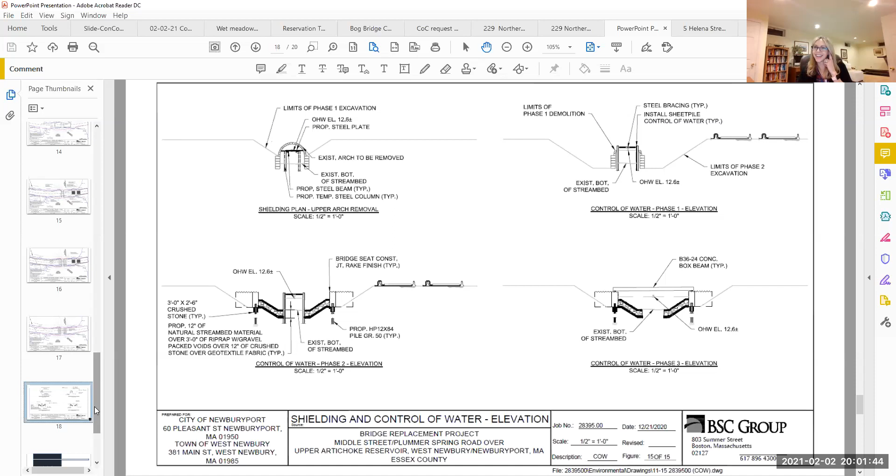Back in 1895, someone realized that there was global warming. Once upon a time, no, only kidding. So

I'm on the resiliency committee, and as part of the resiliency committee, we formed a subcommittee to determine the elevation of first floors for the Waterfront West project. Some of you may remember that. So right now, the first floor buildings are controlled by the FEMA 100-year flood. I'm simplifying this whole conversation, but this is essentially it in a nutshell.

So the subcommittee tried to figure out what future sea level elevation we should force developers and contractors to build their project towards. What we concluded in the subcommittee was, if you guys remember, FEMA +6. So FEMA +6 feet. We applied that to this. I met with BSC, presented, went through the methodology of FEMA +6, a very simplified version.

The 6 feet is in the year 2100. Our subcommittee all put together the sea level rise height that we think will exist in the year 2100. There were 5 of us, and we took the average. It ended up being 6. You guys have heard the models. Some models go up to 10. For this particular location, we chose the simplified version because Woods Hole has not completed a thorough model of this area, and that's fine. We don't really need it.

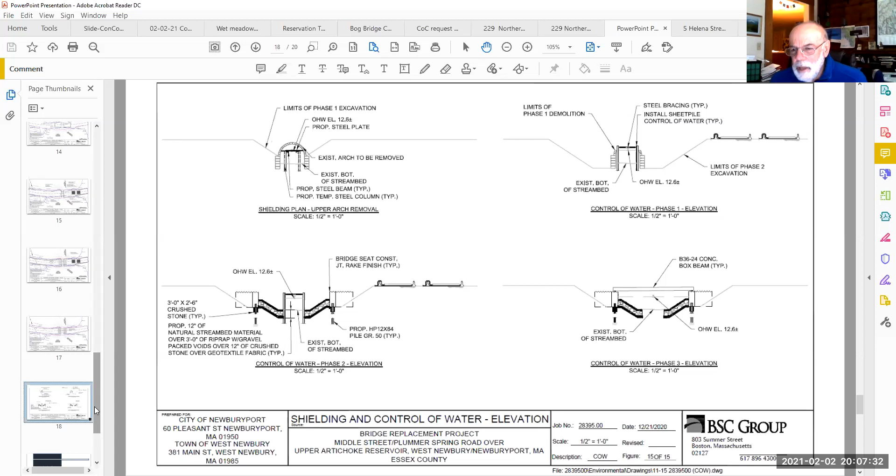Yeah, what about the other dam? I forget the name of the street. It's right down next to the river. Yeah, so Curzon Mill. For all intents and purposes, with sea level rise, that's going to be inundated. What they do with that road is out of our realm because that's a private dam. Actually, come to find out, it's a 50-50 split in ownership between the city and this private trust or the landowner.

But all these discussions on the calculations in the proposals we have now, Steve, we are not touching that dam as of right now, okay, because water flows upstream on that dam now on a high tide. Correct. And without getting into too much detail, I would love to, because I like to speak. The lower dam is elevation 8.7. So we're lucky that even a 10-year storm, or definitely a 25-year storm, between a 10 and 25-year storm for the Merrimack, that's going to back into our system.

So we're at a level of urgency to get that emergency sandbag system in place. Yeah. There's still, in the lower Artichoke, there's a good amount of excess volume if you have to put those sandbags in there for any period of time, right? Or even with a newer dam, there's still a lot of leeway in there for that.

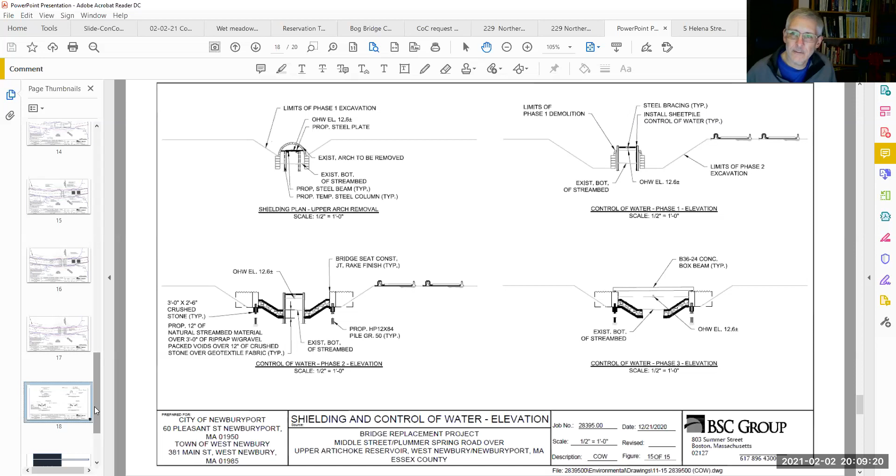There's going to be a lot of discussions on that, Joe, because the bottom line is historically DCR doesn't want anyone to raise the water level of a reservoir. Just from a general historical sense, I would challenge them and say, hey, this is climate change. We have sea level rise. We're one of the very few that are on the East Coast. Newport, Rhode Island had one, but in all of New England, I couldn't find one.

And there's very, very few public surface water supplies up against the tide. There's probably plenty from the mid-Atlantic down to Miami. But DCR for our state, they've got to allow us to raise that dam. We'll be having that discussion. I don't see any way out of it. No, it's all climate change. It's not the old days, it's not something that we want. We have to do it.

No, it's part of the resiliency committee job to strengthen such things, to fortify such things. So, I would agree. All right, do we have anything else for this? For now? So for now, we'll have the site visit at 9 a.m. on Sunday, this coming Sunday, the 7th. And we can expect some modifications to the stormwater design with whatever this water quality unit being proposed might be. Is that correct? Yes, that's correct. Okay.

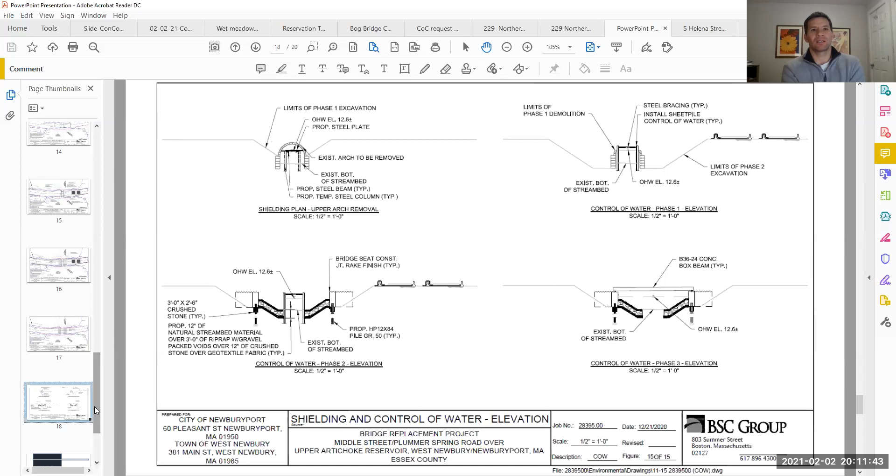All right, sorry, Micah. So should we send this to the next meeting? Yeah. You guys want to continue for 2 weeks, or do you think you need more time than that? I think we're gonna need more time. Based on the site walk, we'll have to figure out how much effort it's gonna be. So we would need more time. We can do the first meeting in March, whatever that date is. That would be the 2nd. Okay, does that work for you guys? Yes.

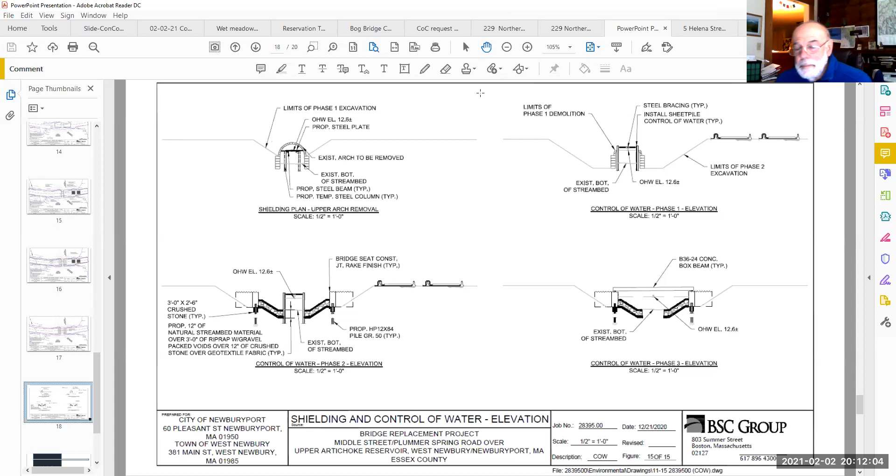All right, got a motion to continue? Motion to continue to March 2nd. Second. Second. All in favor? Aye. Aye. Opposed? Okay. All right, thank you. Thank you, Commissioners. Thank you. See you Sunday. Yep, see you Sunday.

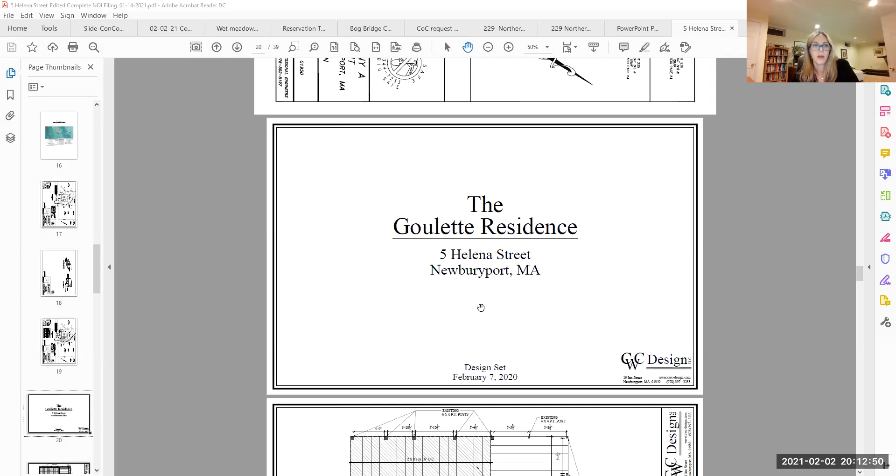All right, next item is Kim Goulette, 5 Helena Street, notice of intent. Okay. All right, here we go. Okay, I've promoted Michael Seecamp and Kim Goulette to panelists, and they should be able to unmute themselves when they're ready to talk. And Michael, maybe you want to give a brief overview of this project?

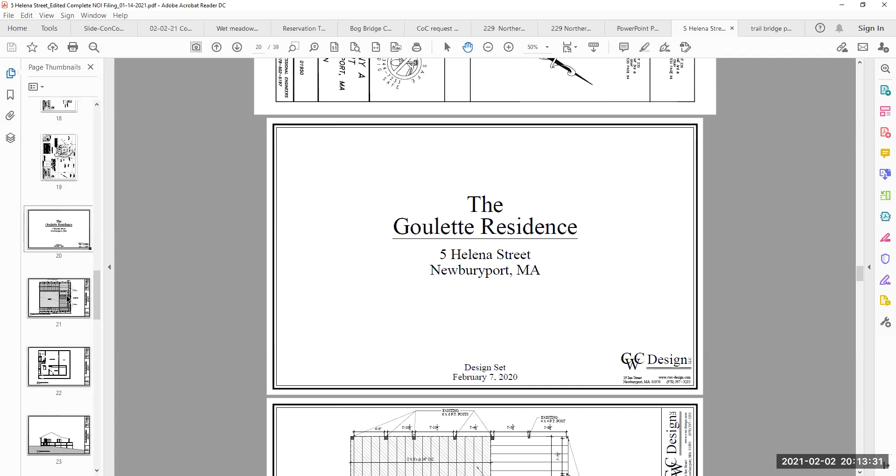Yeah, good evening. Michael Seecamp here, Seecamp Environmental Consulting. I don't know if you recall, but last spring, before things kind of shut down, we were before the commission on an informal basis to show a concept plan. The original plan was to expand the bedroom and then add on some additional deck. Right now, the cottage has a deck going pretty much on 3 sides. Okay. Yeah, you can see there.

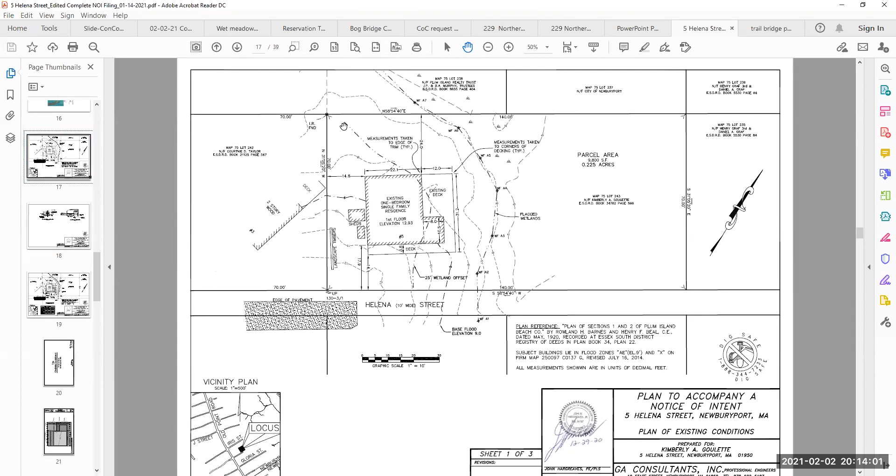So we wanted to go out basically to the north, pretty much. I'm sorry, to the east. And that would have brought it closer to the bordering wetland, which borders on a mud flat, basically. This is on the basin side. And so we were advised that, no, we can't do that. Need to stay at least within the existing footprint, since you can't meet the 25-foot restriction.

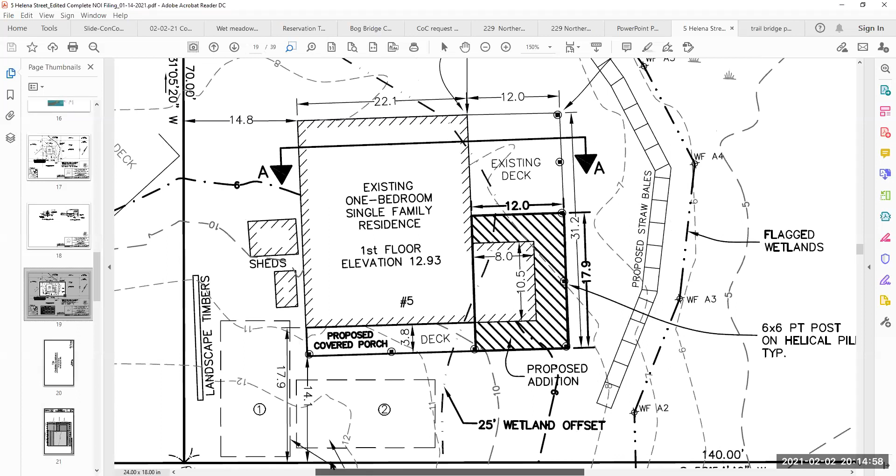So we redesigned, and back and forth, we had appraisals done. We had the engineer show the existing and the proposed. We have it all labeled with the dimensions. Now the proposed addition is going to take up a portion of the existing deck, and the existing deck is going to be replaced in the same place because it needs repair. So you can see there the cross hatch section is the expansion of that little bump out bedroom there.

A portion of the original cottage is on blocks, but most of this is on piers. And we're going to be obviously removing posts that are currently there and replacing them. And there'll be 19 removed and 13 will be used to replace and support the addition and the existing portion of the bedroom and the replaced decks.

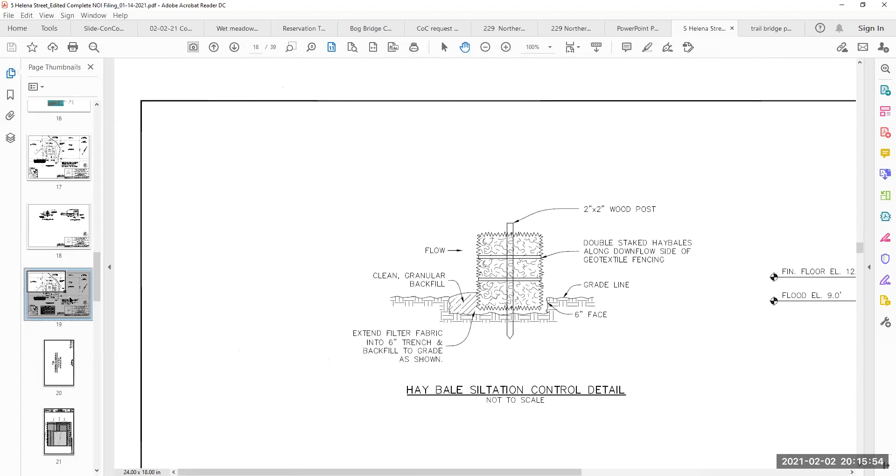The lowest support member is over 2 feet above the flood elevation, which is elevation 9, and that's on, thank you, Julia. Great. Let's see if I can find that. Right. This wasn't the elevation. Yeah, that was it. Move it over to the, yeah, there you go. So that shows the elevations.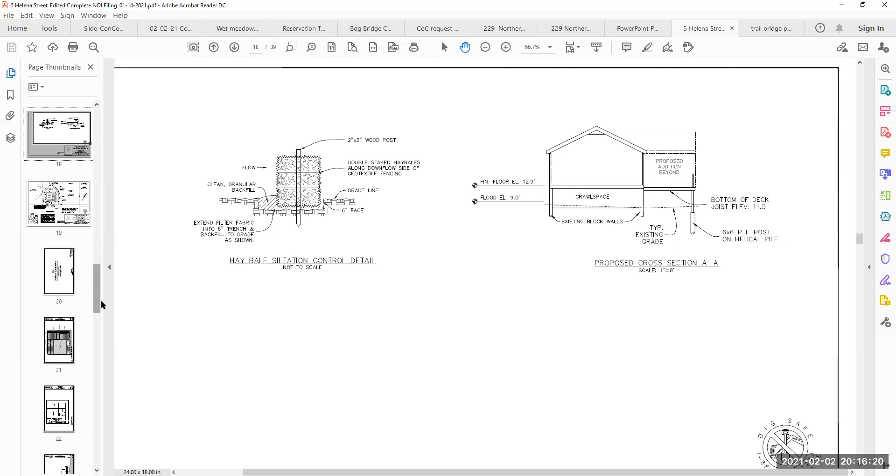It's also greater than 2 feet above the existing grade in that area on the east side. So we meet the elevation rule and we meet the 50% rule. Let's see. Well, we meet the 25% rule. I'm sorry, the 50% rule.

Yeah. The addition of living space will be 132 square feet, and that's less than 25% of the 689 square feet existing. And on the 50% rule, the value of the increase in the size of the bedroom, $7,000, will be less than 50% of the existing dwelling, $119,000.

Now, I believe that the appraiser is online with us as well, Scott Hammerstrom. And if there are any questions regarding the evaluation of the property, I'd have to defer to him. But we included all that information in the filing, obviously. Yeah, both appraisals. So they did an appraisal of the existing dwelling and an appraisal of the proposed new dwelling after construction to show that it was not going to be more than 50% increase in the value.

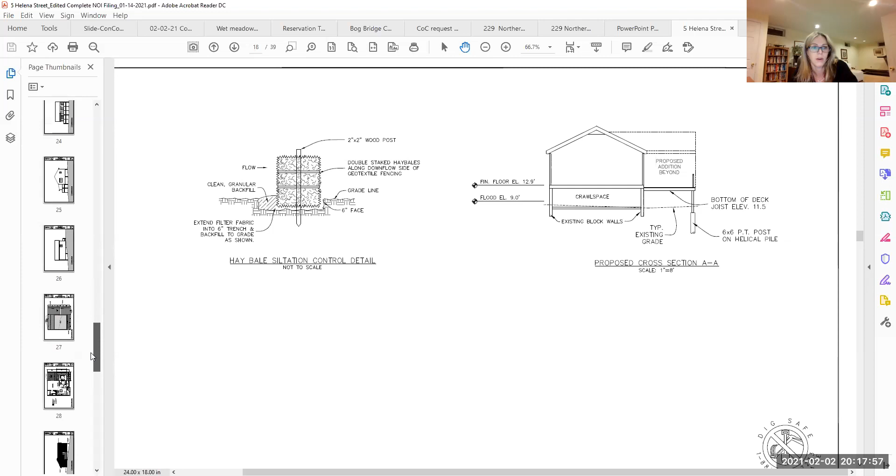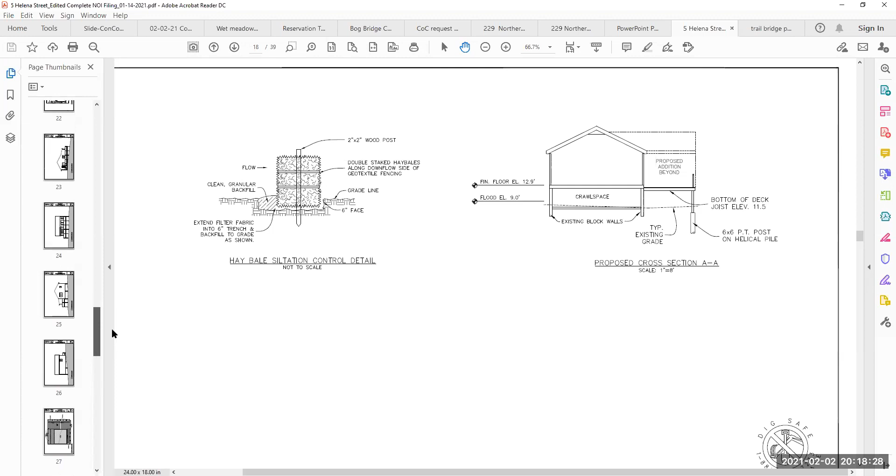And then Julia, I think you had the question after we initially filed regarding any temporary disturbance, and I have the restoration plan outlined. We don't know the extent that it will be, but we know what the final result will be when we restore, and what we restore will all be beach grass, Ammophila breviligulata, wherever there's a disturbance. And the area is not maintained as lawn.

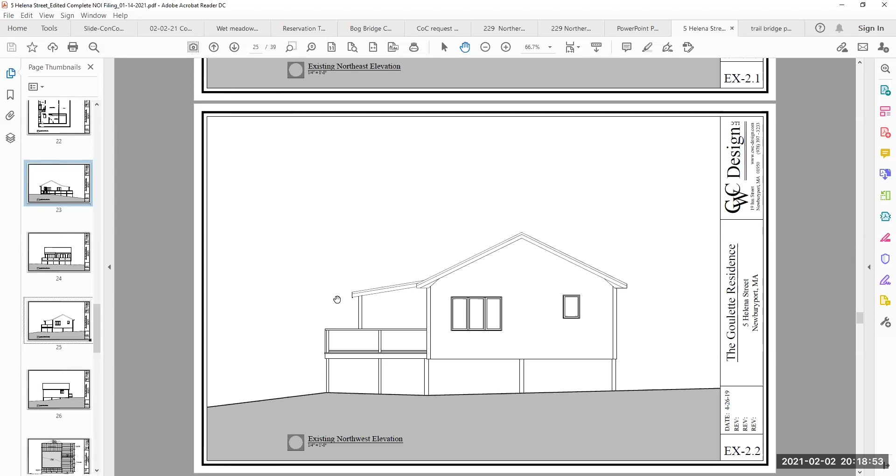Between the deck facing the wetland is a lot of rugosa rose, which likes it on the sand, as you all know. And that's pretty much it. I'd be happy to answer any questions.

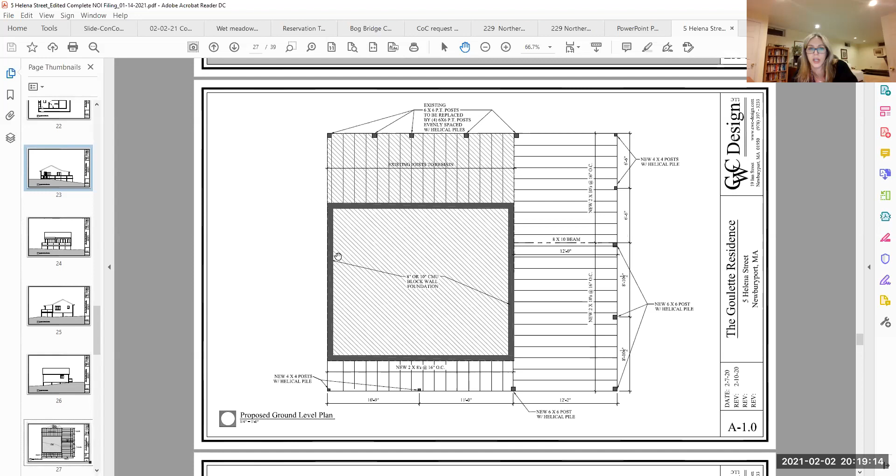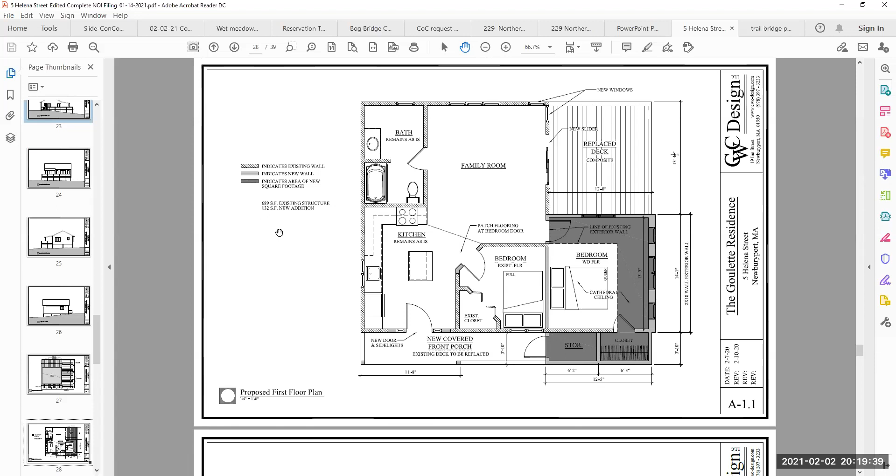Just scrolling through these plans, you can let me know if you want me to stop anywhere. This is showing the new helical piles that would be put in to support the addition. And here we can see a little more detail in the floor plan of the added bedroom over the existing deck. Right. So the addition will be taking up space of the existing deck. There'll be no increase in the footprint of the property, and everything will remain open underneath the decks and the addition. Right. So this is actually pretty straightforward.

You can see here this is the final elevation. Am I correct, Michael, that this solid area with no windows is the added bedroom? Right. Which was a continuation of this existing deck that we're moving around. Yeah, and the wetland is to the right of that graphic. The wetland is down here, down gradient, and it's salt marsh. So this is really right on the salt marsh and right on the basin.

But with this addition, the impacts are really from the new helical piles, from the replacement of the old deck with new decking and new helical piles. But it's all temporary impact and no permanent new impact to any part of the dune or the salt marsh, because again, there's no change in footprint. Correct.

So did we have a high tide line anywhere on any of the drawings? I'm just wondering. Yeah, probably on the, let's see. Well, we have the flood elevation. I would say the high tide line is probably that contour below the wetland line.

Seven right here, 7 feet. No, further down, the other side. Further down. 6 or 5? Yeah, about 5. Yeah. Okay. Yeah, because my delineation is actually bordering vegetated wetland, and it borders salt marsh / mud flat.

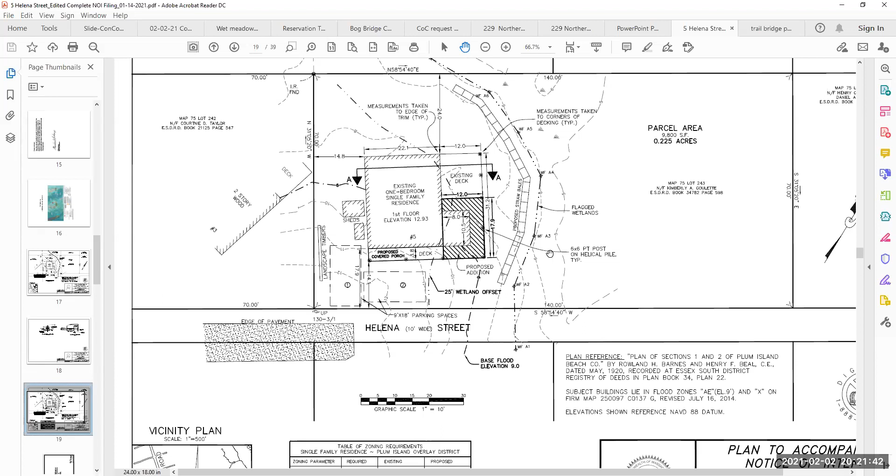So there's a section between my flags and that contour that we just looked at, which is basically a bordering wetland. It's not a salt marsh. Okay. So there's no Spartina in there. No Spartina there, correct. A little further, the seaside goldenrod, which usually is on the piles when they dug the ditches. That's where that grows. So it's just above the high marsh.

Okay. And you're in the 25-foot no disturb zone, but we're not going any closer. Right. Okay. Okay, looks okay to me. Anybody else? Not hearing anything. Any questions by the public? Which I forgot to do last time. No, not seeing any. What would we like to do?

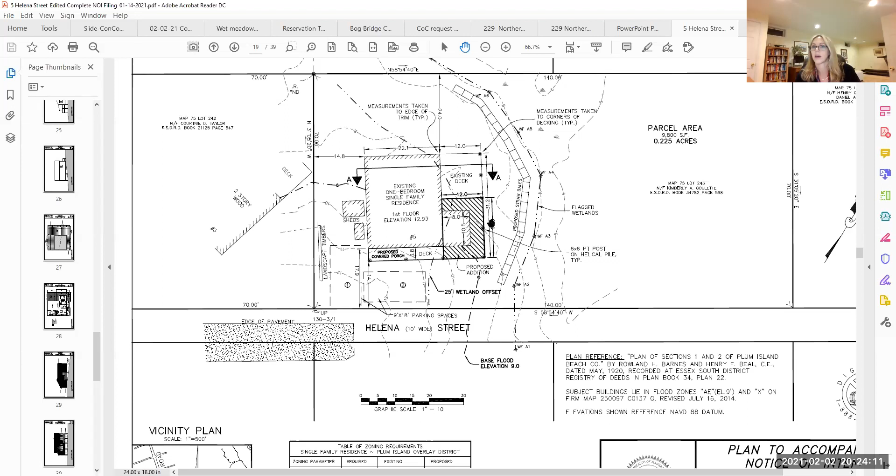All right. Just a quick question on that one. I didn't see a DEP number. Was that just something we put on? Sorry, there was a DEP number issued for this, and it is 051-1046. So they're all set with that. It took a while, but they originally submitted this notice of intent months ago, and it just took them a while to get the revisions that we needed on elevations and some other details, as well as the appraisals. Okay.

All right then. Can I get a motion to close the public hearings? So moved. Second. All in favor? Aye. Anybody opposed? Anybody abstaining? I hear none. Okay. So next item is enforcements / violations.

Anything new on 11 76th Street? No, nothing, and we should absolutely have something by now from Tom Hughes on this. It's been going on way too long. So I will get in touch with him and find out why that is held up. I think it was promised to us by this meeting, so I'll connect with Tom tomorrow on that one. Okay. 5 Doe Run Drive.

You guys all might remember. Do you want to move forward with that? I've got to abstain, and I'm going to go offline here. Okay. You guys might remember, we talked about this at the last meeting or the meeting before. 5 Doe Run Drive's backyard abuts essentially Joe's backyard. And it was observed that the owners of 5 Doe Run Drive were out in their backyard, which is behind a fence. The previous owner of 5 Doe Run Drive had been into the Conservation Commission a couple of years ago, maybe for an installation of a fence.

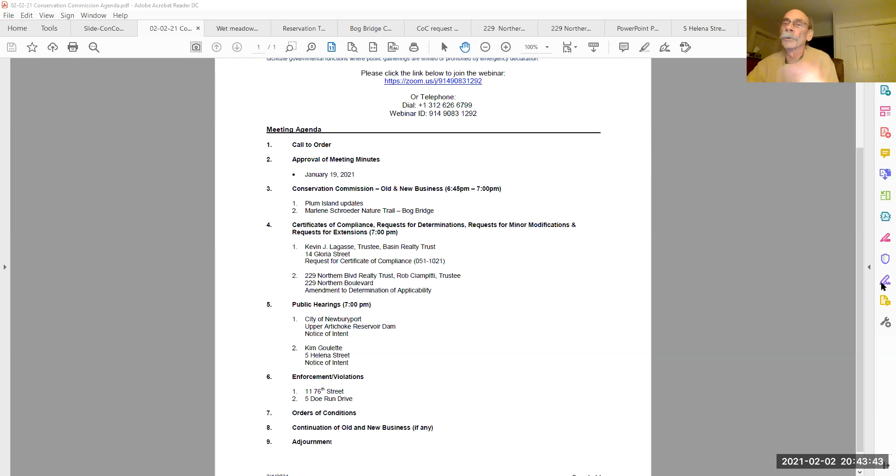Sometimes an applicant will come in with a notice of intent, and they'll say, well, what do you want us to do? And you say, no, you tell us what you want to do. Yeah, in general, even though we're talking with Jerry Mullins about the bog bridge, that's a little different. But you want to limit it; you can give them ideas on where you think they should go, but you can't be telling them what to do, because then it becomes your problem.

But at the same time, a lot of people in the city and folks out on Plum Island consider us to be more experienced, with more understanding and more expertise in the issues around Plum Island as a coastal resource than they have. So they're coming to us to ask questions like, is this something that's permittable? Is this something that would be okay on the dune? So they need advice from the commission.

We can't say yes, we can permit that, or no, we can't permit that, unless they present us with an actual project. Right. But they need advice, they need help thinking through some of these issues. Because it's so ongoing, it's like an ongoing conversation all the time. It's like you said, it just doesn't go away. Yeah.

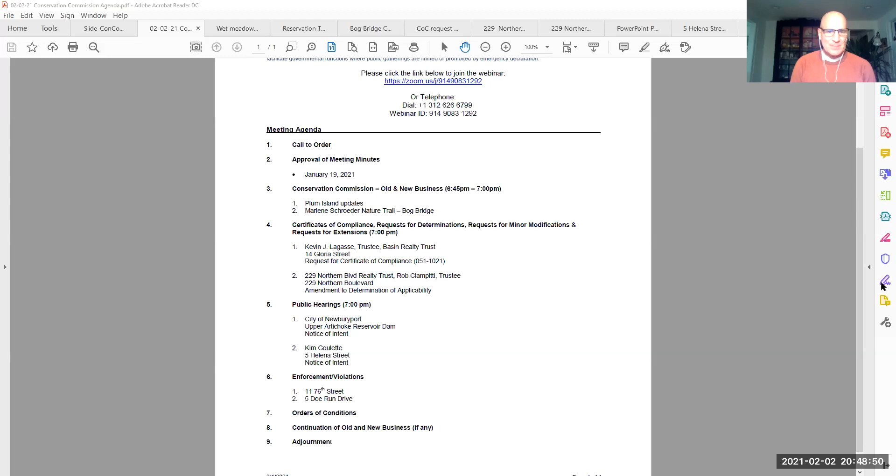Prior to you sending your email that the bags were put in today, I was watching the news last night when I saw them going in. I thought, oh, that's interesting. I wonder if Joe approved that or something. Yeah, they got a lot of coverage on the news. They were out there, the water's going over them, the bags are getting washed away. It was the place to be last night for the local news people. I wouldn't have wanted to be there. It was bad. It was pretty impressive. But I guess with no beach, the waves are just breaking on the bags basically, and whatever those logs were.

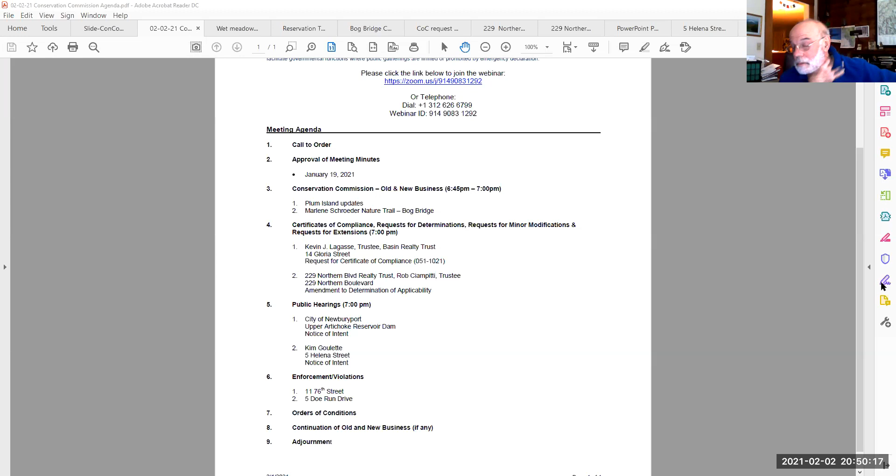Wait, I do have one thing, and it's okay that we adjourned, but no new applications came in for the next meeting in February. And we continued the bridge project until the first meeting in March. So right now there's nothing on our next meeting in February. Do you all want to hold on to that and talk about Doe Run Drive, or do you want to put it off till March? I have no comment. What about we get Tom Hughes about 76th Street? Yeah, I'll see if I can get Tom Hughes about 76th Street, and if so, I'll put it on the agenda. It can be a short meeting. Yeah, that's good. See what happens with that. I'll let you know. See what Jerry has also. Yeah, we'll make arrangements with him too. We might have some more Plum Island updates. Right. Good chance of that.